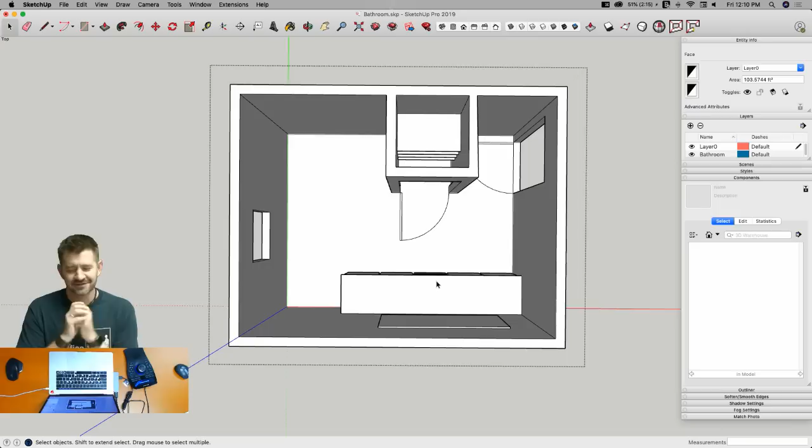All right, I already had a question, so let me throw this out here. In my left hand is the 3D Connexion SpaceMouse Enterprise—you can see that name on it. It's a 3D mouse that allows me to move around in 3D without touching my regular mouse. This mouse is from a different computer, we can move that off screen. It also has a bunch of shortcut keys you can use to facilitate and speed up modeling.

So here we have our bathroom, and we need to put some fixtures in here. I figured we'd start with the biggest one—we'll put the tub in. Over here I just loaded up a bunch of PDFs; I downloaded stuff from the Kohler and Moen websites, and we're just going to use these as reference.

Okay, here's our first piece that we're going to put in—this is a tub, specifically a K716 if you're interested. That's all the tub lingo I know, it's just the title at the top. Other than that, it's just a tub. So we're going to model this. I don't think I'll model it in place—I think I'll just model it outside and drop it in.

So I think that this is what we'll work off of. Whoa, look at that.

I instinctively grabbed my 3D mouse and started moving it around, and it actually works for zooming and panning inside Acrobat. That's very cool. Learned something new.

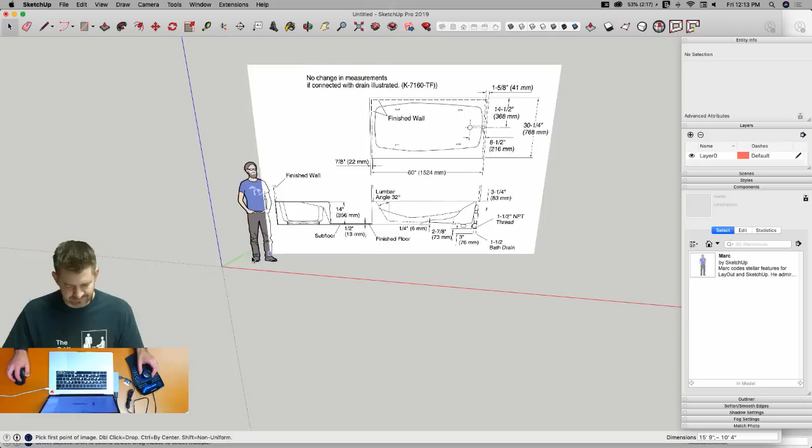All right, that looks like it should be enough information for what I have to model. I'm going to start by drawing a line on top of the image right here, trying to go from about center of this line to about center of this blurry mass. I'm going to use that line now to scale the drawing to proper size.

The reason I draw a line first is I could just click, click, and tell it what size that dimension or reference line is. But by drawing a line first, I can always come back and verify. So I create that first edge in the model, then come in with the tape measure tool and tell it: click, click, that is 60, enter.

You want to resize the model? Yes, I do. All right, so there we go. That makes sense, if you look at Marc's, if he bent in half, he'd fit in that tub type space.

I've got something weird going on because of the field of view. I'm going to set my field of view back to 35. It got changed because I imported that first image as a photo match, so it started to distort my field of view to make that photo match happen.

All right, so I'm going to start with the rectangle. That rectangle is just going to be the outside shape of my finished tub. So I'm going to come here to this point, come up here, and type in 30.25, and 60. I'm working in an architectural template right now, so I'm inputting decimal inches. All right, so that is my initial rectangle.

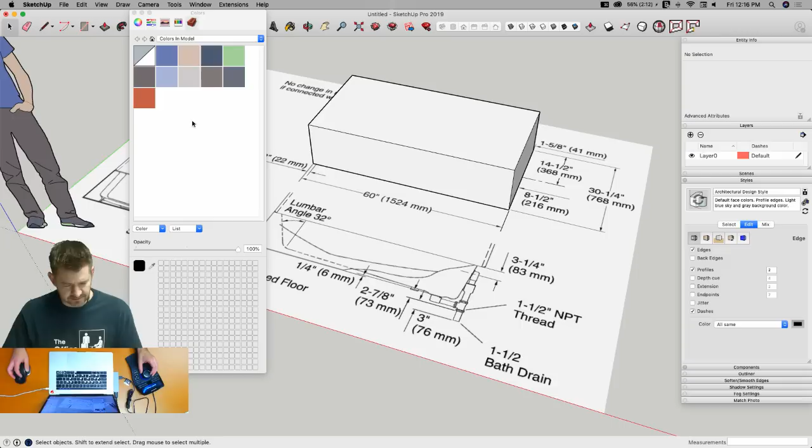Like that, is that better? Is that easier to see? Give me a thumbs up, thumbs down. What do you think, Dave? I'm just reading comments as I wait for the response. Yep, looks good, thumbs up. Sounds like... and a heart. Ooh, we got a heart. Sounds like there's a little bit of a lag, but yeah, okay, that works.

Sure, yeah, and one of the other questions was about modeling or turning out by axes. I actually do this a lot when I model things that are supposed to be on specific axes, I use that a lot. Some people get confused by it, but I'll model with this reddish color for right now. That sounds pleasant. That sounds lovely.

All right, I'm gonna hop to a top view. What I want to get now is I just want to trace this shape. I don't have a whole lot of dimensions for what this shape is, but I do have the shape here. It's not actually centered in the rectangle, it's actually just off axis. So I'm gonna draw a line to divide that top face, and then off that face I'm gonna draw some lines here, just to kind of square up so I can see what it is I'm drawing.

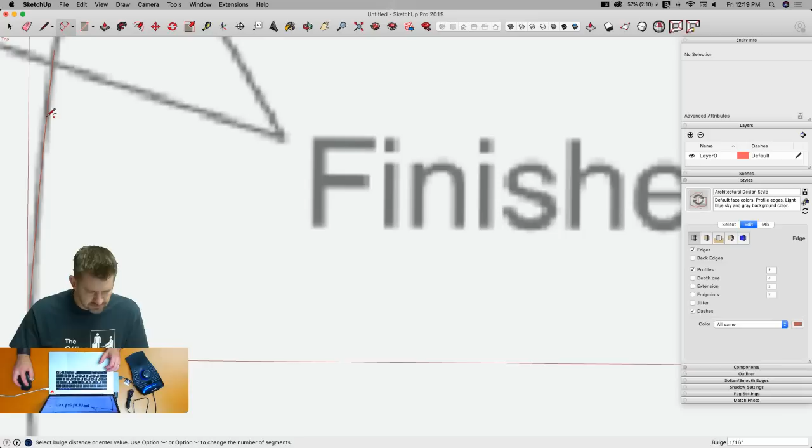And by clicking from one arc to the other, you saw that blue line showed up, which is showing tangent. It's actually just continuing that into a smooth arc there. So if I get rid of all of this and I turn off my X-ray, that's what I got right now. And that looks beautiful. That's exactly what I want right now.

To mirror it, I'm going to pick that surface. I'm going to use rotate to click and use option to just flip that over to the other side. There we go. All right, so that is the top of my tub.

Now let's talk level of detail. Hold on, I gotta get out of parallel projection before I get a headache. I'm very sensitive to that. So level of detail. Level of detail is incredibly important when you're modeling something like this, especially something that comes off of a real world object like this.

It is possible, and I have very little actual detail here. You guys can see this is very simple, I know. So from the side, I have a 32 degree angle off of vertical sloping down, and then I have an unspecified angle here sloping down towards the drain, and then almost no information. So I'm assuming it's pretty close to vertical. That's all the information I have right there.

So with this, I can actually use this image to kind of get an approximation of the geometry there, but it's not going to be perfect. But as far as level of detail goes, it's always a good idea to model to the actual usage you're going to do. So if all I'm going to do, if this is getting dropped into a model where the only intention is to just kind of figure where placement's going to be, I'm moving pieces around, this is meant to just represent a tub, all I need is a massive geometry that says tub.

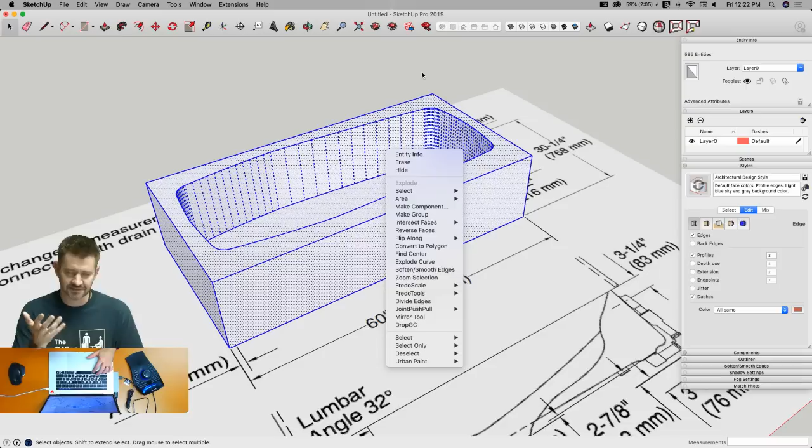All right. Now what I'm gonna do now, this line, I'm gonna take a copy of it and I'm gonna put it right here.

And good thing I set that color to red because I wouldn't have been able to see it on top of the drawing. It's like Dave knew where I was going with that. Thanks, Dave.

All right, what I'm going to do here is trace this profile of the inside of the tub, cut this profile out also, and project that the other way.

I can take these three different solids and create solids out of it and merge them together to get one tub piece. We're doing 3 different ceramic-y type things. I think most tubs are made out of fiberglass now, but you know what I'm talking about. A toilet, sink, and tub.

So I'm going to try to do them 3 different ways. For this one, I'm going to use solid tools, maybe some round corner or something like that. I think with the sink, maybe we'll loft that, and I think I will model a subdivided toilet. We also have a couple pairs of faucet or sets of hardware to model too.

There's going to be hardware in the tub and hardware in the sink, so we will have to come back and model that as well. So we got lots of things to model. Less talky, more modelly. Okay.

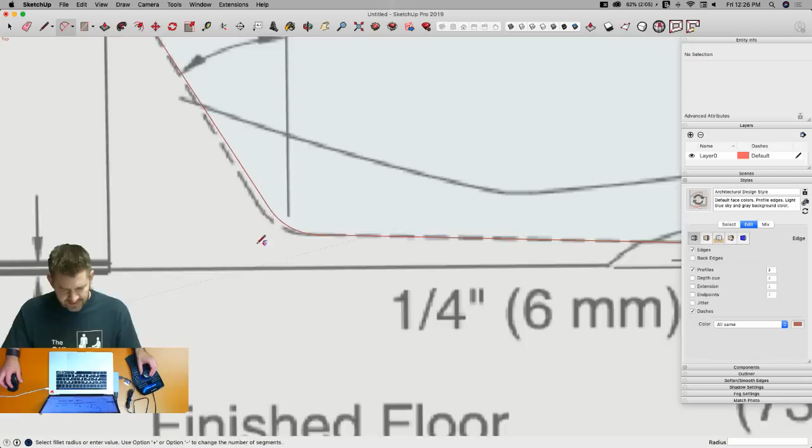I'll do the same thing here. This gets a little weird because what I actually have right here—you see I have multiple lines here and here—because it actually changes profile, right? It's wider here in the middle than it is right here.

So this line right here represents this thick part right here. This right here, I'm assuming since it's the highest point, is right here. Really, at this point I'm just trying to think of the best way to go about this. Really what matters, what's consistent, is this right here.

Here, I need a reference line again, so I'm going to go this way this time. And I'll take these two lines, bring them over here, and turn them 90 degrees.

Let's see, where's the... call that the middle. All right, so with that, I'm looking at something like that.

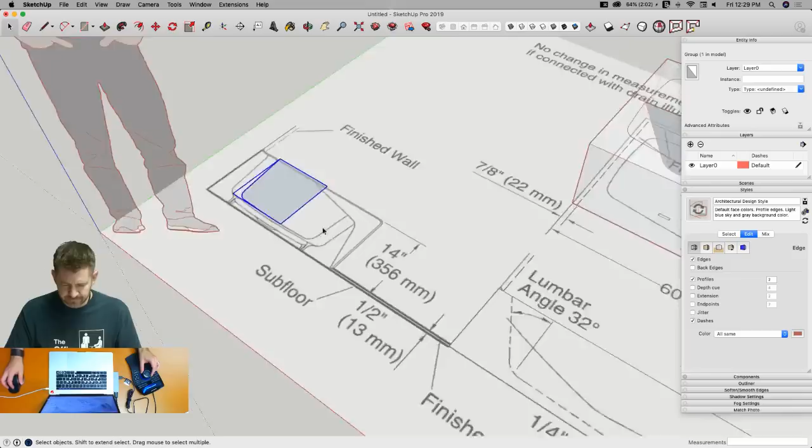So I'm going to take these two groups and make solids out of them. I'm going to click on this one, make it big, both directions. I want to go past the full geometry of the tub. Open up this one and hide the rest of my model.

This is the one I'm not quite sure what to do with, because this profile changes so much. But just to start with, I'm gonna do the same thing here. I didn't weld, got some broken geometry. All right, there we go. Same thing over here, didn't weld. And I'll take this.

Drop that in that space, and then same thing, pull it up. Put down, and then also clean up around the edges.

So now I'm curious, if I just intersect all of this with itself, each of these pieces, I just intersect them all together, what am I gonna have? So I'm gonna make a copy because this may well be disastrous. We'll have to see. Let's see, this is a group, this is a group, this is a group. This is not a solid. We're gonna run

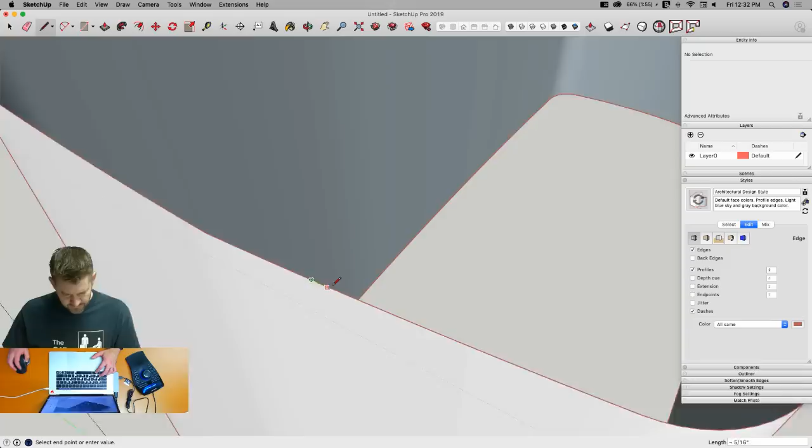Left just at the overlapping pieces. I can already think of one spot that's gonna be a little odd here, so we might have to back out of this, like I said. So I'm gonna just start by making a copy and setting it aside.

All right, so we got to work on that. That's not going to work. I don't know, that looks like it looks like something. It does not look like a tub. The biggest issues we have, so we have, this is decent. I mean, this profile looks okay. This kind of looks like what we're looking for.

This, on the other hand, is not going to work. So we did get the cut at the middle, but it didn't come taper back. You can see that. So I think what we want to do, this is my thought, we're just gonna make a lot of copies of things. I think I grabbed the wrong two. I want this and this, and bring them over here.

All right, and I'm gonna go ahead and explode these because I actually don't want most of this geometry. So what I'm thinking, dangerous thing to do, is that I want to take this profile and trace it around this edge. So I'm going to re-weld that.

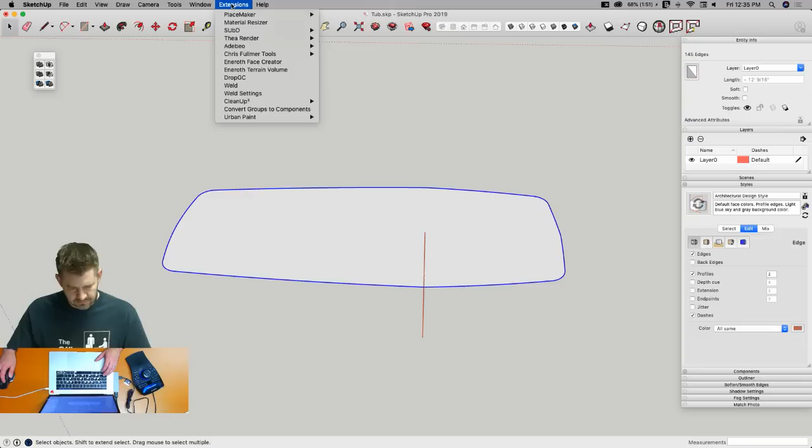All right, explode that. All right, so what I'm gonna do is I'm gonna grab this, I'm gonna say follow me, and my follow me face is in a group right now, but I can right click, I can say edit group, and then click on the surface. That surface will then follow the path, even though that path is outside the group. And that gives me that, which is okay.

Click in here. I've got some extra geometry here to be cleaned up, but overall not too bad. The problem, of course, is we're missing this profile. So what I wonder, if I was to take all of that, let's run solid tools and see how much of that it'll fix.

Not enough. All right, I'm just going to go like this. I'm going to scrub it with the eraser tool and hope I don't create any holes in the mesh. Oh, looks like I'm okay. Oh, nope. See? As soon as I say something like that, it all falls apart.

Kind of like, wow, I really set up without any problems at all, ready to live stream right now.

Sometimes it's the only way you'll learn. Me. All right. Nope, that's not. I know. When am I going to stop talking?

All right, let's see now. I'm going to hop inside of here and start selecting and deleting surfaces rather than trying to drag and delete lines. Sometimes it's easier just to click in, get rid of the surfaces, and then let something like cleanup or solid tools get rid of those extra lines.

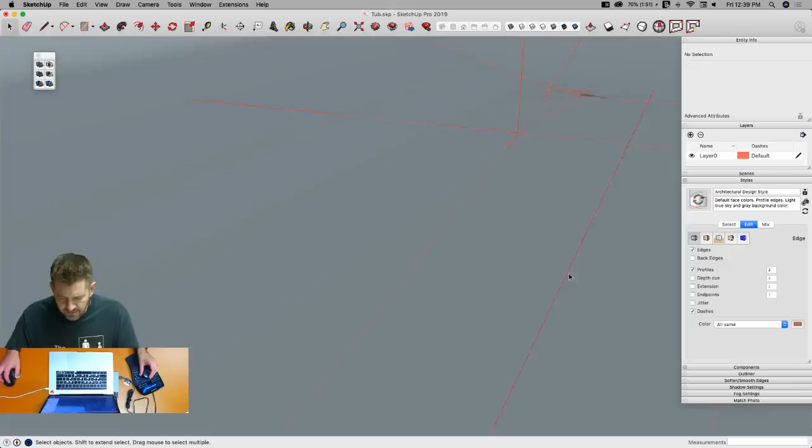All right, so, as Dave says, I'm going to take just these two and get an intersection of those two, see how that looks. And then what I might be able to do - but now here's, again, where I'm pausing.

Select this, some of this geometry. I don't think this is going to work with the intersection. I think I have to back up and do this a step earlier. If I take that and scale it this direction - no, I can't do it with regular scale, but I could do it with taper, potentially, taper scale.

What I could do - this is fun, not really, sometimes it's fun to wing it. Maybe not for you guys, you're like, oh come on man. Let's see, maybe I'll start using these just as reference. So I'll take this to the lowest point right here, like that.

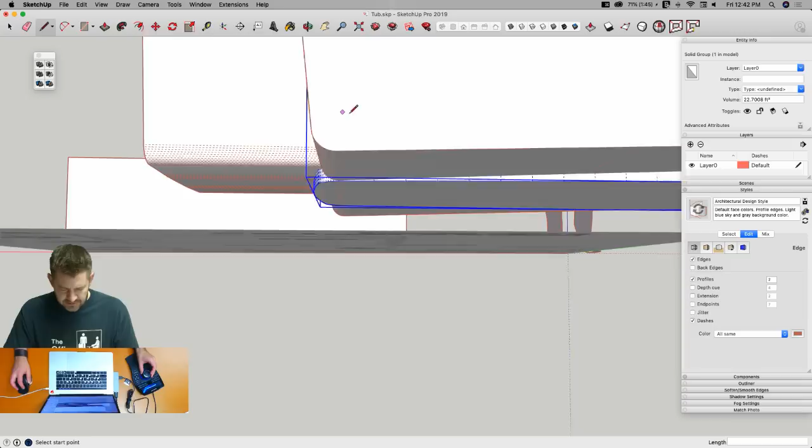Take that out here, and then for reference, I'm going to make a group because I don't want to merge any geometry. I'll take this, bring it up like this, bring it around like this, slap this right here, hop into X-ray, and now take this and I can scale that.

To match that shape. My only problem right now is that I don't have the slope, but I could do that too. I think I might want to do the slope first though, right? Who am I asking? Are you asking Dave?

I don't know. So I'm going to grab this, paste this in, make that a group as well, get that vertical, move that in to right there.

And I kind of wonder if I could just - think if I rotate this, it's going to distort too much, but hey, trying things that turn out to be bad ideas seems to kind of be my thing, so I'm just going to go ahead and grab that. That's how you become better, right? That's right, it's called learning from my failures. Ooh, we could rename this whole series to that.

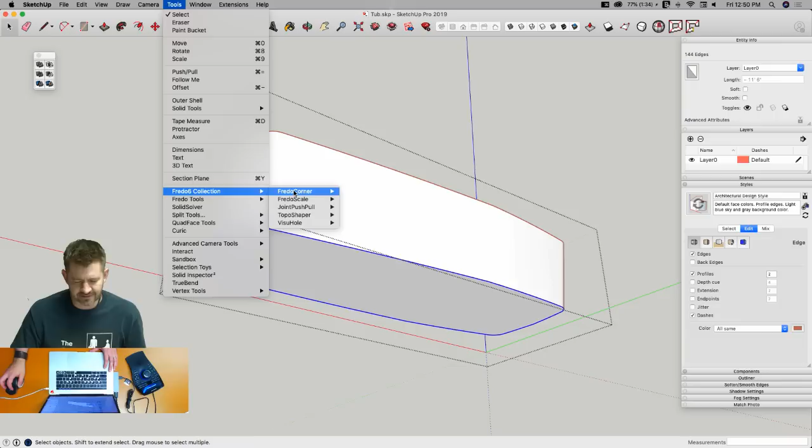Will be using SketchUp over the holiday. All right, nice, something fun hopefully. What are you making, Dave?

All right, so we should be good now.

Ooh, building furniture from Marvin. That sounds fun, you have to share those in the forum.

FredoCorner, round. Yay! I don't know, I don't know what happened there. That was weird, that was just, I don't know, I don't know what that was.

All right, so I'm gonna take a look at a couple sizes here. I'm gonna grab 3 inches. That's too much. 2. 1. All right, so there's a 1-inch offset, or 1-inch round corner. Kind of like that. I might bump up to 6 segments, make it a little bit smoother. Hit the check mark.

That makes sense, that's about where I'm at. Error message, sweet. It's just not your day. Oh man. Yeah, it's pretty cool. Yeah, I know, Ruby error. I got it, I understand where I'm at.

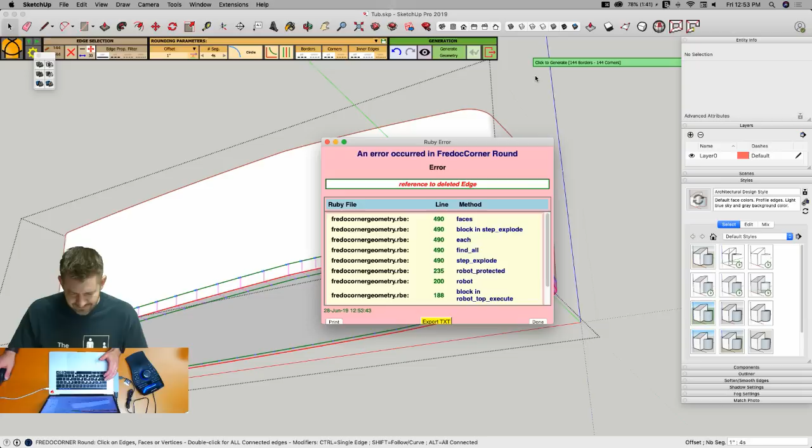I wonder if my edges are just so small. Usually when I have a problem with round corner, it ends up being something like my edges are just so tiny it can't make it work. That's less than a 1/4 inch. It might have something to do with that. Not that I have a good solution for fixing that either.

All right, well, here's the thing. I'm trying to think how far we want to go with just getting something in there. There's a couple ways I could think of doing this right now.

We could try, yeah, we may scale it up and see if round corner likes that. One of the things we could do right now, again, this goes back to level of detail, right? Because I could come in here and grab these lines and soften and smooth those lines, which will give me a soft appearance inside there. Based on level of detail, that might be good enough. Unfortunately, when I say it that way, it totally sounds like a cop-out.

So we're gonna try a couple things before we throw the towel in there. I'm gonna copy this over like this. Actually, no, I'm gonna do it like this. I'm gonna grab this, make it a component, and I'm gonna call it tub. I'm gonna take my tub, option copy over here, and scale this up by 100. And now we have a big tub.

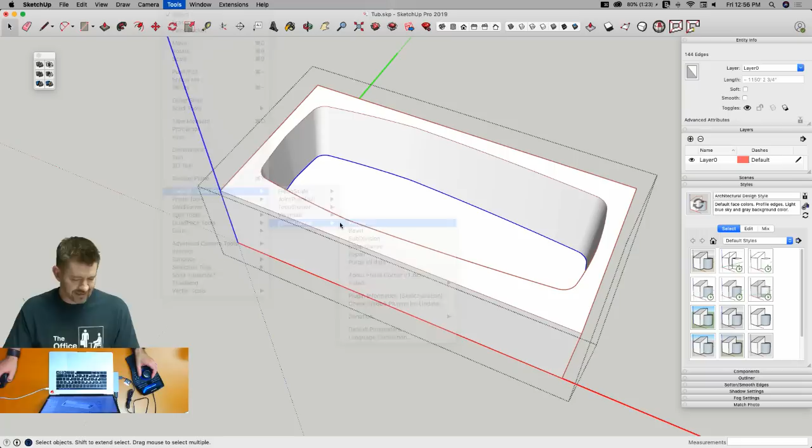So I'm going to say Tools, Fredo Collection, Round Corner. And maybe we'll go up to, we do a 4-foot round corner? No, that's too big, that's ridiculous. Why would you even ask that? All right, 3 foot, 3 foot's too big. So what it's telling me is when it goes around the corner, it'll actually create overlapping geometry and it's not gonna let me do that.

So I have to drop down, 34 inches, 32 inches, what did I have before? Okay, 32 inches will work, 2'8". Check mark, get my round corner, exit, and then what I can actually do is select and delete this big version because I have my original version right down here, which now has nice round corners. Teeny tiny, but they're nice and round. So that gives me that little nice soft inside corner there. Whew, made me work for it, but we got it.

All right, I'm gonna come in here. One other detail was that rounded corner in the front of the tub. And to do this, I'm just gonna throw an arc right here, a tangent arc, pull that to the other side, and then alt erase to soften that. All right, with that, that's my initial tub.

I could come in here, well, I'll just go ahead and do it. Show me this. I'm going to... right here is the surface. So I'm just gonna do this to get a quick drain in there.

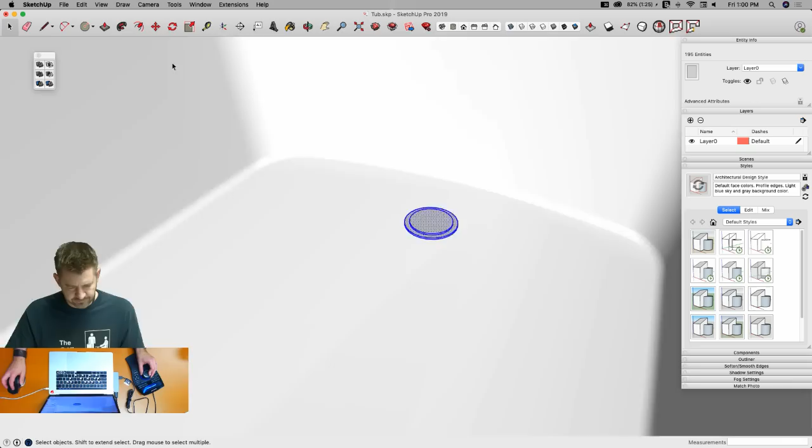Now I have just this edge around the outside here, and after I save, I will go to Fredo Collection, round corner, and try this one more time. See if it'll let me go a little bit bigger on this one. That's 3 feet. How's 3 feet sound? Boom, do it then.

Oh, we got a little weird geometry here, but we'll check that out. Something lapped back over. I don't know what this is. That was odd. Anyhow, it's gone now.

Every once in a while that Fredo corner will do that, and actually it's kind of interesting because normally in a case like this where you round it over, it'll end up creating that surface back over that fills that gap, so it kind of covers the tub back up. So I was kind of surprised that didn't show up, just a little edge showed up.

Having said that, all right, we have the tub I think we were looking for. So I can delete this, and I'm gonna come back down here. So this is already a component, we've already created this and saved it as a component.

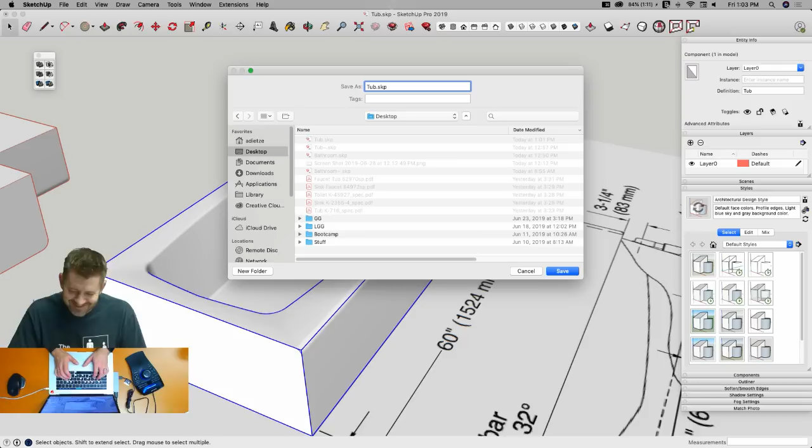That's something you might want to keep in mind when you go to do something like that: if you just take your SketchUp file, you're not going to be able to directly import without everything else coming in. By hitting Save As, you're taking just that component, putting its own component out over here to use. So just an FYI. All right, so I want this to be snapped back to that back corner.

Hey, you know, for being what I would potentially refer to as a bit of a nuisance to get going, that looks all right. That looks pretty good. I'm pretty happy with that. Pleasantly surprised with how well that turned out. All right, time to start the abuse all over again.

Hopefully you guys are learning what not to do. Somebody said they're using this as a learning experience. I hope so. I hope this is helping you guys, because, well, you saw, I don't have to explain. The rest of it's going to go swimmingly. Nowhere to go but up, that's what they say.

All right, let's create a sink and drop it in here. So I'm going to save my bathroom. I'm going to go to File, New again, and hop back over to Adobe. See, my Mac's doing weird stuff too, like every time I switch programs it doesn't show it. So there may be something else going on here.

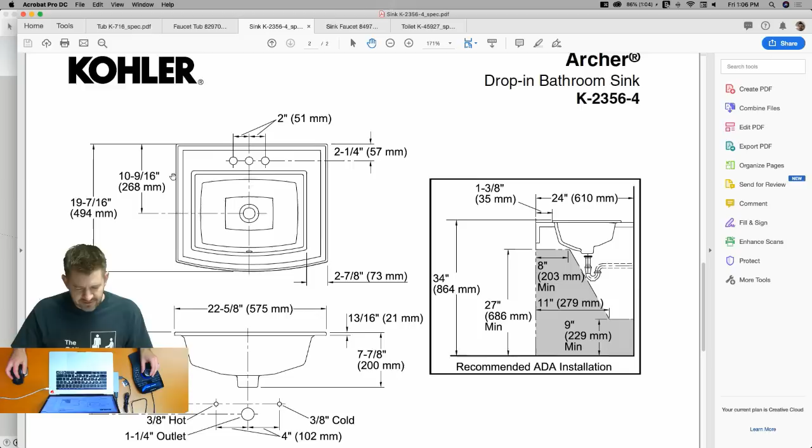All right, so I'm going to take another screenshot, pull this in as my reference image. I don't think I need anything off of that, that's all installation, so I'm just going to grab that. I'm going to hop over here, File, Import, and we're going to grab image, use as image, and grab that newest screenshot I just made, and make it nice and big.

So here's my thought. My thought is I'm going to create the profile initially of this sink, and then create this profile right here, this lip that drops down. If I look at it, this is actually a slope, it kind of slopes back down and then into flat. So create that profile here so it slopes up, this section's actually a slope down, and then this is flat. So create that profile, create this, and we'll start by just following that, swinging that around, and then we can come in from there and fill in the actual basin of the sink. So we're going to do that.

This may be an opportunity to model half as much because it does look like this sink is symmetric, as are most sinks, of course. Say that like it's a unique thing in this particular sink, but sinks are usually the same on the left and the right. All right, something like that.

Vlad says you can use sandbox tools for this model, it might help. That is true, sandbox tools would work on here too. I don't use sandbox tools as often as some people, and that's not a knock against it or anything like that. I'm going to come in and change my... how's that look on the screen? A nice orange color, because I'm drawing on top of black lines again. I don't end up using sandbox tools very often, I'm not sure why that is. I think maybe when you start using something, whatever that thing is, you kind of develop your own workflow and the tools you prefer, and those ones kind of leap out at you. I think I just never really learned sandbox tools very well, so as a result I just don't use it as often as some people do. There's nothing bad about them, I think they're awesome tools, and I think there's some very cool workflows you can do with them. But yeah, maybe I need to do that, I need to learn myself up on some sandbox tools.

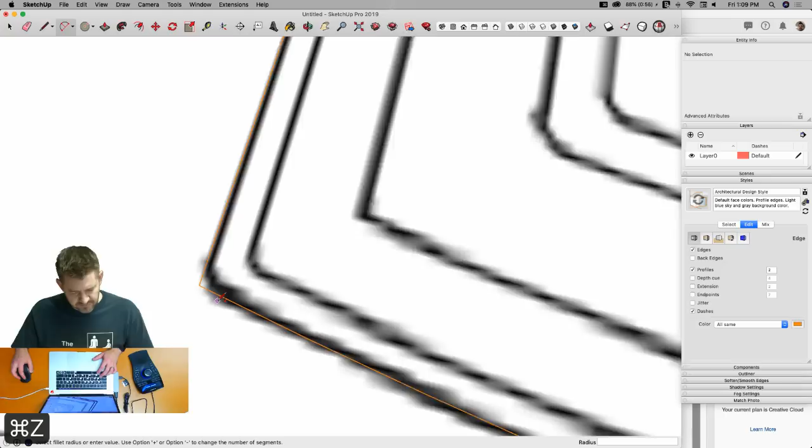A larger arc right here. I'm going to give the material some depth. I'm going to say our sink's about that deep. Come over to here. Something like that. I'm just going to use a couple more arcs to soften these corners.

Ooh, yeah, that's nice. All right. So with that, I am going to take all of this minus the image, so just those lines now, and I'm going to weld them. All right, so I should have one continuous line.

Again, I weld before follow me, so I have a nice continuous curve. Follow me will break at any line breaks, so I won't have a continuous, nice, smooth curve all the way around if I don't weld it first.

All right, so with that path selected, follow me, and I'm gonna click right here. All right, that looks pretty good. It's inside out, but I think it'll work. We did have a little bit of overlap on these corners.

Not necessarily a bad thing. This is actually something that happens a lot. Oh, I was a little bit big. This arc, I'm actually going to undo a couple times.

So this, all right, so I should be inside. I should be more like that. Maybe that should be at that line. Let's try this.

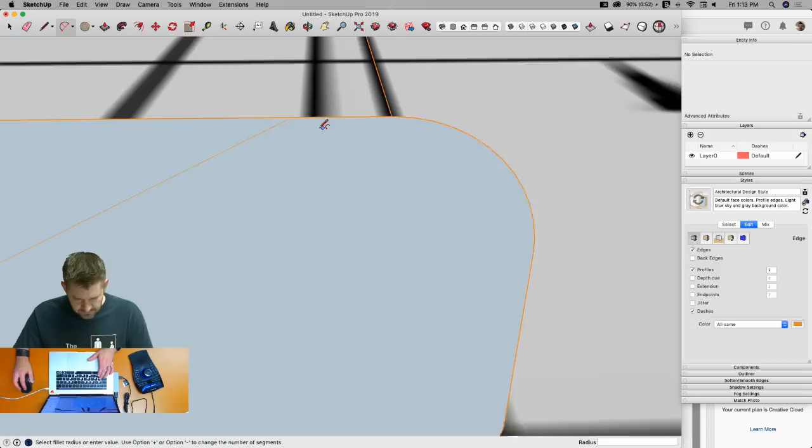And then while everything's selected, I'm just gonna right click and say intersect faces with selection. And that's gonna give me primarily this cut right here where these two faces—these are flat faces. If I show this, they're just going in and touching each other. So because it was such a tight corner, it didn't clean that up.

But now I can actually come in here, delete some of these extra lines. Actually come in and I don't need that. Don't need that. Just any of the surfaces that were created by that overlapping geometry, I can now get rid of.

And I can come in with Alt and soften some of these pieces. Now there are some spots that are weird in that if I flip around on the inside, you do have this additional geometry hanging down. But I can fortunately just grab it and delete it. I should have one on either edge.

There we go. And this is basically—there we go. And then again, I think I actually had a little tiny surface here that didn't close up. This may be a sub-millimeter issue here. I don't know, it was just tiny geometry, I guess.

We may have been able to actually—is that another snap point? No.

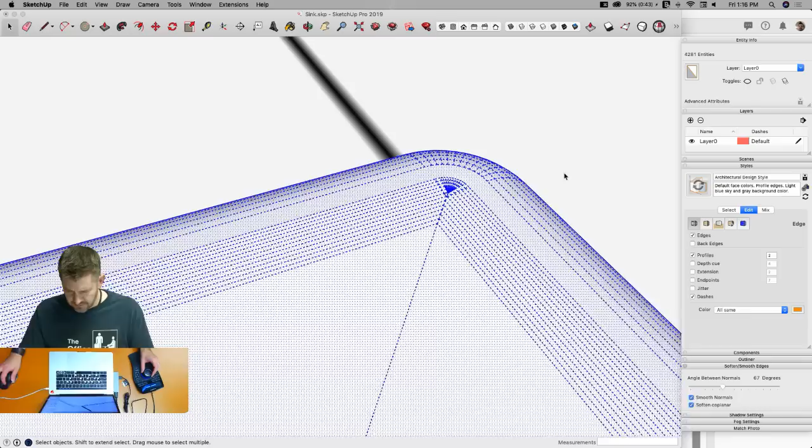One person said solid inspector 2. That would have helped. And then another one is saying, why not offset the path line and create an inside path and use follow me? It will avoid overlapping. That's true. Yeah, I could have actually come in here and done that. That's a great idea. See, you guys gotta be louder.

I was head down, thinking, talking. That was all my fault, sorry about that. Type in all caps and I'll make sure that's right. I'll relay that message. No, don't do it. Don't do it. All right.

Okay, so I'm going to pull this geometry in. I'm going to basically finish this top level geometry. This is the top, this is the bottom, so this part is the flattest part, that's this portion right here. And I have this section which is right here. And then all of this looks like a rounded, sloped part right there. That may be able to be included on a follow me. Then this will have to be lofted, this will have to be lofted, and this will have to be lofted. We have lofty goals. One more arc right here.

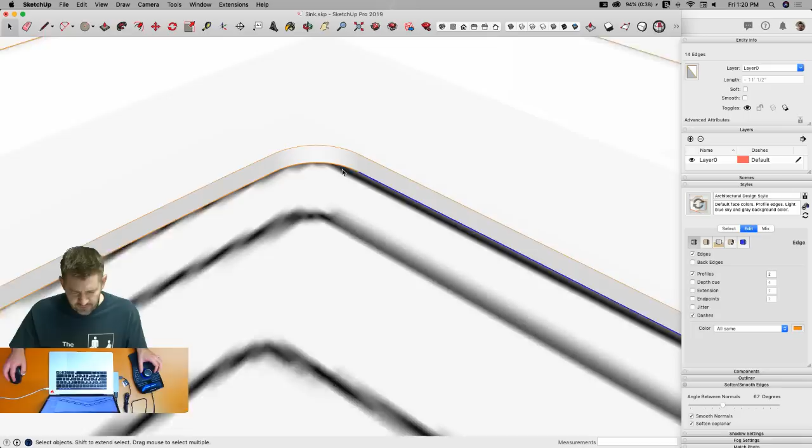All right, I'm grabbing it all. There we go, grab that, and I'm going to offset that once to here. Can I come down to here? Nope, that profile doesn't match anymore, totally different once we get down there. All right, so that's as far as I could go, just that one. And like I said, I kind of feel like that's actually just an arc going downward, so I'm going to do just that.

Dave says weld didn't work because of the fork in the edge. We're modeling sinks, not silverware, Dave. That's just not paying attention. Because of this, is this what you're talking about? Yeah. Because I told it to do something it couldn't do, and then I was irritated that it didn't work. Sounds like a software user to me.

All right, I'm going to unhide my image and come in here and round these corners again. And actually, this is going to be a bit of an issue. No, I don't want to do that because I can't use this to round, I have to use my outside profile to round. So get rid of all that. Because what I want to do is actually follow this path. When you do something like follow me, you can only follow one path, so I don't want a path for top and bottom. If I was lofting, that's what I'd want, but in this case I'm going to use follow me.

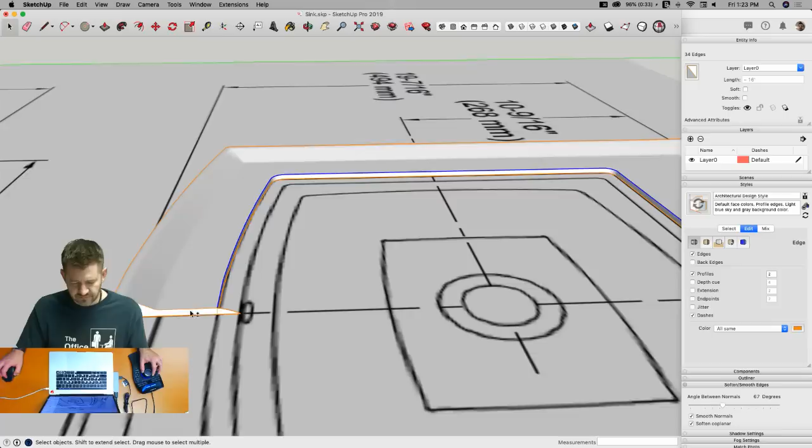I'm going to go put in my arcs right here, so I have my two arcs. This is going to be the profile, I'm going to try to get that nice rounded corner. I want to try to do that. So I'll just drag this down to here. Then I'll also take that profile and put that on the edge of this line. Whoops, missed it. I lost my model, how'd that happen? I dropped through the floor. All right, we put that like that, pull that down as far as it'll go. It's right there, so that gives me that.

Now all I have to do is loft a corner. I don't want to necessarily loft all this. Actually, I could probably do the same thing here, I could probably use follow me just on this first part. Let's see. Only one way to find out, and that is to try it live in front of a couple hundred people. No pressure. No.

Vlad wants to know if offset would work for the first path. I actually did offset, you mean this path right here? Yes, I did offset, but offset is a two-dimensional tool, so it took the line and offset it. It won't take full geometry and pull it over or anything like that. So I'm going to grab that path and then... lost some persistent IDs. All right, follow me just along that path. So that looks pretty sweet, that's nice. So to get this portion right here, this is where I'm just going to do some lofting.

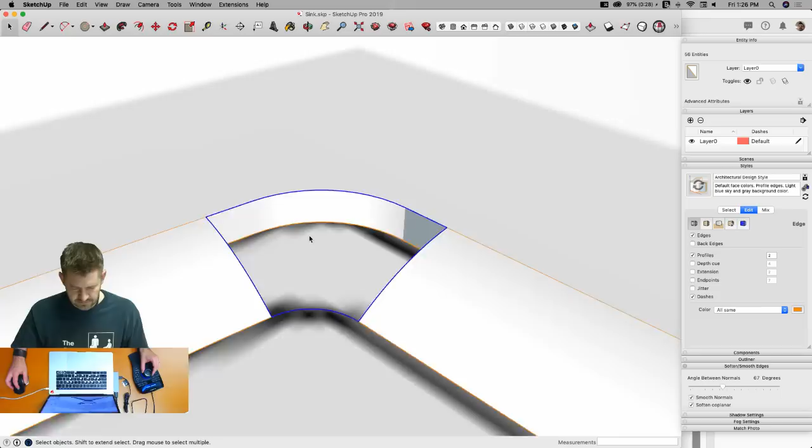Alrighty, that's how I roll. That is apparently how our day's going today. You know, the problem is that live streaming's a young man's game, and I had a birthday yesterday, and now I'm old. Maybe that's what it is. I'm going to have to recruit somebody younger to come in and do this for me. Oh man, now I'm sore, and everything's going bad.

All right, one more time with feeling. Turn off these lines, and these lines. Swinging around.

All right, we'll go to Tools. It's not there anymore. All right.

Everyone's saying you have to stay, no younger people. What if they're more capable? Oh man, it's good, it's fun, it's something. And everyone's saying happy birthday. So, oh, thanks all, there we go.

I had that kid. See, here's the thing, much like when you work in an office, you're like, oh, do I mention that it's my birthday? Do I just keep it quiet? Yeah, we never knew, it's just kind of what you do when you get a certain age, I guess, just keep it on the DL. Nobody wants to admit it. And I think when you're in an even bigger group like this, it's more impetus to keep it quiet. Maybe I had to unburden that, and now that it's out there, it will be lifted and everything will go smoothly.

You ate too much cake yesterday. I have, oh my gosh. Okay, so speaking of being mature, I had a straight up sugar hangover today. Oh man, I came in. I did not drink any alcohol whatsoever, but my daughter made an awesome cake, and my wife bought me donuts for breakfast, and I came in this morning. I had just a headache, stomach was a little unhappy, oh man, it was. So the nice thing is, for all you young people out there, one day you get old enough that you don't have to drink alcohol to feel hungover. You can do it just by having dessert. Oh so yay, something to look forward to. Oh man, yeah, so good stuff.

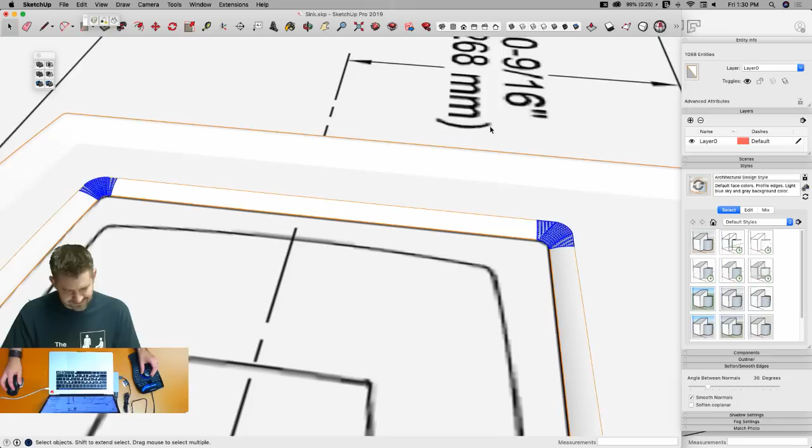Looks awesome. And since everything's going to go perfectly from here on out, I'm feeling very good about our future. So I'm going to save that.

I'm going to unhide my image, and we're going to talk about these pieces right here. So to get this in, I'm going to do that. Actually, I don't need the surface, I just want that line to work off of. I'm going to work my way out. Start with a circle right here for the drain. So that's where it's going to come down to, where the sink will terminate into our drain hardware.

Just like I did before, I tend to draw my lines that I want to reference first, and then I'll come back. Ooh, that actually is a pretty close to straight line, maybe a little bit of an arc there. I'm going to grab an arc, go from here to here, a lot like that. Another arc from here to here.

Actually, I think this is symmetrical, so I'm only going to draw a quarter of this sink. And I am going to draw a small round corner there. I'm going to use the same size arc as I round all corners. That's going to make it much easier to go in and loft, because it'll be the same number of edges. I'll get a nice even loft that way. If that doesn't make sense, hopefully it will in the near future.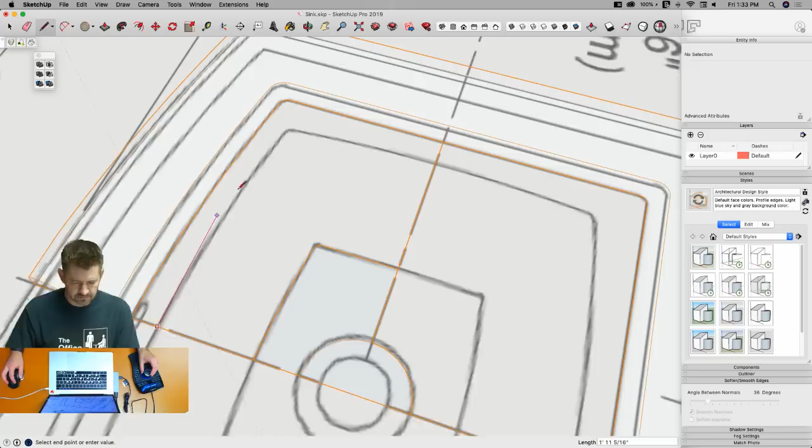All right, so there are my steps of the sink. Like I said, I think—oh, I can't. So I will have to loft this section and this section, but this section right here I'm gonna have to do separate, it's two separate pieces because this loft is gonna be different from this loft because of the curb at the front of the sink. But that's okay.

I'm gonna grab these pieces and take them over here now, line them up with this point, and bring them up like that. Now what I can do is grab these different edges and offset them up to the right vertical height.

You guys noticing too how not all of this is lining up perfectly? Somebody said, why aren't you using the mirror plugin? That's a good plugin. Actually, I just for the first time used Curic Mirror this week.

Now, if you guys have seen that, it's a pretty cool extension. It's on the extension warehouse. I don't want to spoil it because I did a video on it, and Kara's in charge of content, so I'll get in all kinds of trouble. But it is a very cool extension. Like I said, a lot of you know I haven't used a whole lot of mirroring extensions in the past.

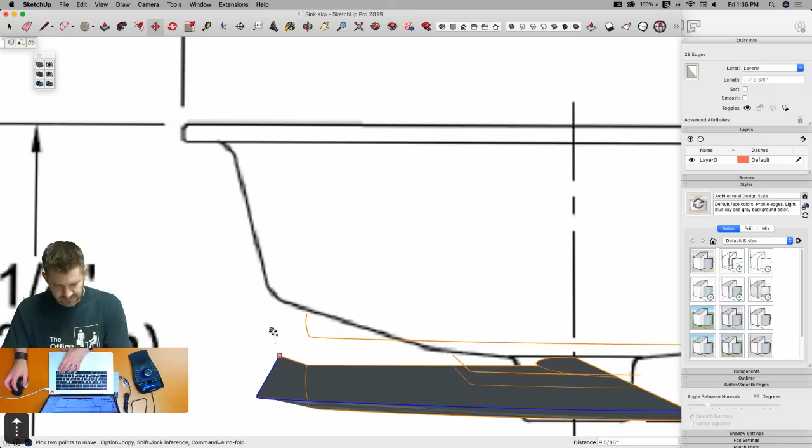But in reality, this plan—so probably not going to believe this, but there's a potential that the plan is a little off. That's a thing that happens on occasion. Yeah, I just blame the plan. I know, typical designer. All right, take that.

I'm gonna take all that now, rotate it flat, and I'm going to drop it now right here. Get rid of this. Go back to my normal perspective camera, and rather than moving this out of the way, I'm just gonna hide it. I know a lot of people don't love the hide functionality, but I like doing it to get rid of geometry when I can. All right, this is looking cool.

Actually, now it looks really deep, doesn't it? It's a deep sink, that's just what it is. Now I need to get this. Oops. These are my different layers of angle here. So I will want to put a little bit of a kind of a turn on there, a little bit of an arc, if you will.

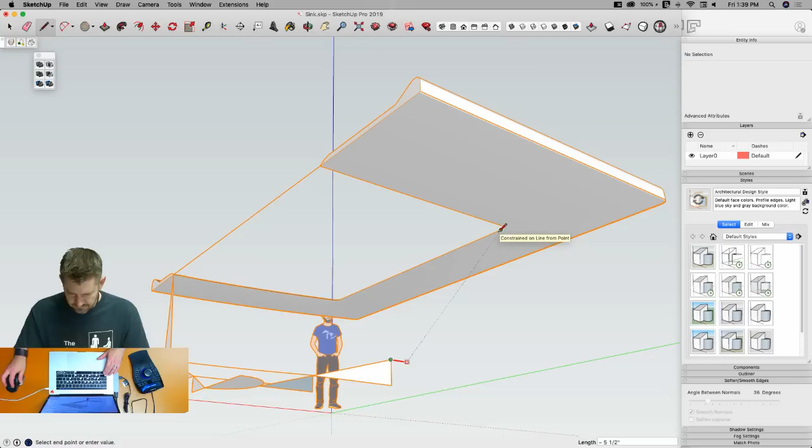I'm gonna copy it out here, like that, and then I'm going to just rotate it 90 degrees and see how close that comes. Not so close. Okay, so I was just checking that.

So apparently this kind of sink is common in the high-end market. Oh, that's the reason I'm not familiar with it. Is that what you're saying? Oh, go back to Walmart and get yourself your cheap sink, Aaron.

All right, I'm gonna save. No, it is a cool looking sink, that's why I grabbed it. All right, I'm gonna try lofting this piece first. All right, that looks pretty slick.

So where did you find this sink? Somebody's looking for a photo of it on their site. There you go. It's a Kohler K-2356-4.

I went through the Kohler site and just grabbed a tub, a sink, and a toilet that looked like they might go together. Yeah, that was all the work I put into it. So it is, but I liked it because it was a cool looking sink. It had a lot of faceted yet not flat geometry. Silly me, no, just kidding.

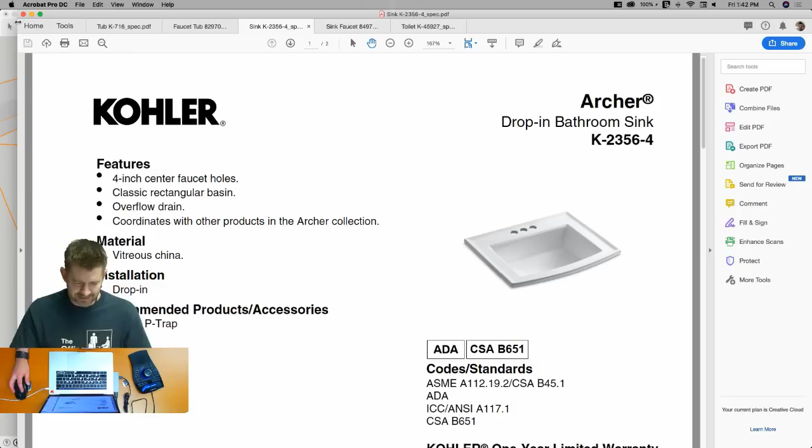And they can find this model on the 3D warehouse after you're finished, right? Odds are good. All right, at some point. I did put up last week's just recently, so yeah, this hopefully will go up as well.

All right, now that I have this copied over here... what was that? Uh-oh, I made something not straight because it didn't close. Undo. I want to figure that out before I go any further.

So here is a vertical plane. What did I do? It looks like it's... oh, no, look at that. I messed something up. Had to go talking about how everything went well there. Exactly, you jinxed yourself again.

All right, so if I pull this over, I'm gonna try to be reckless and see what happens. What could possibly go wrong? It's just a teeny tiny bit, so I think I'll be okay doing this. Nope, dang it.

All right, let's do that again. I'm not quite sure how I even did that.

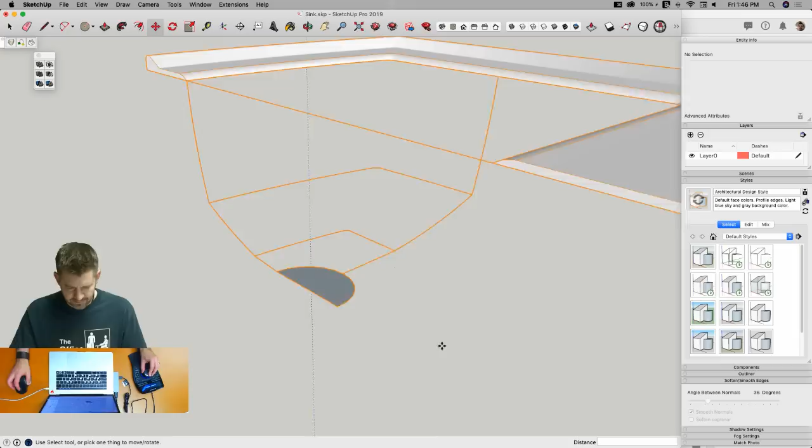All right. Oops. Figures, oh, I missed a chunk. Ah, little extra line segment down there.

There we go, skin it. All right, this is going to be good. All right, there we go. Hopefully there we go. Let's copy and see.

Copy these two, scale that to -1 again. Grab that and snap it where it needs to go. All right.

Anybody else do this when they're trying to look at something small, rather than zooming in, move their head closer to the monitor? Man, I do that. It's still, now I'm overlapping.

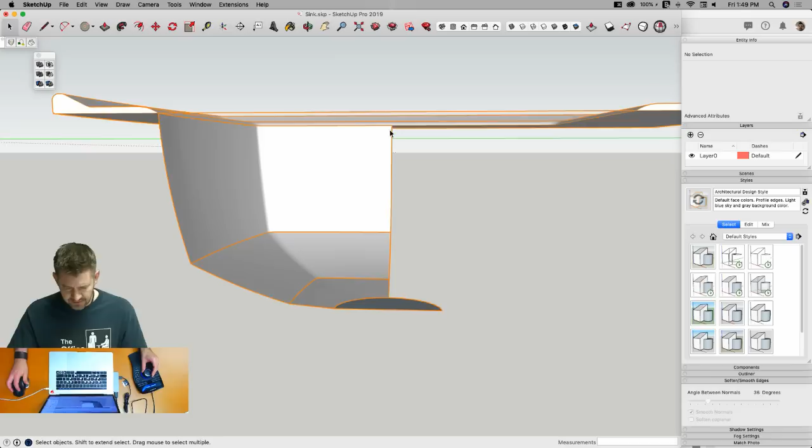Oh, look at that. Oops. All right. So this right now tells me that this is a flat edge. I'm going to check this edge too, just to be sure. Ooh, look at that. Okay, so I'm good now.

So now that means I should be able to grab these. I'm going to grab all of them just to make sure. I'm going to copy those over here. I don't know what happened with you, but I don't even want to look at you.

All right, I'm going to grab this, scale that to -1, and I'm going to stick that right there. And that should all line up. Ah, nice single line. Okie doke.

All right, oh, actually, I'm gonna leave those there for right now. All right.

Last step in the sink. Put another arc right here. Like that. Now I should be able to grab all this.

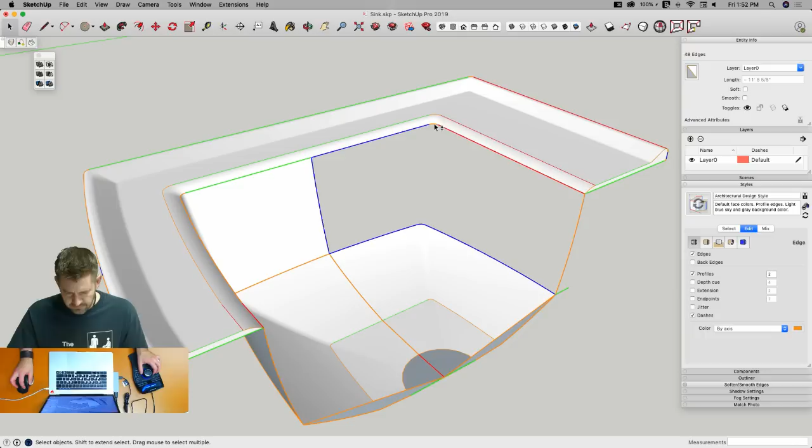And then I'll just hover over this surface right. I gotta turn. And option to copy, and one click. This is actually a pretty dense model. All right.

Ooh, all right, same thing here is gonna be an issue though. I'm gonna grab these surfaces, intersect with selection. That should get this middle line to mostly merge together.

I'll probably have to do a little bit of cleanup though, and maybe just come in here and should be able to delete. This one can be deleted, it's actually along a straight surface. So can this, and on this side too, delete, delete, delete.

All of this can be deleted. And this, because it's at an arc, actually, nope. No, actually I just have to erase it. And then get rid of this and this. Nope, I have to erase those two.

Ooh, all of your followers love flip along and mirror and follow me. They're all shouting those out for this. Woo!

All right. So that's most of our sink.

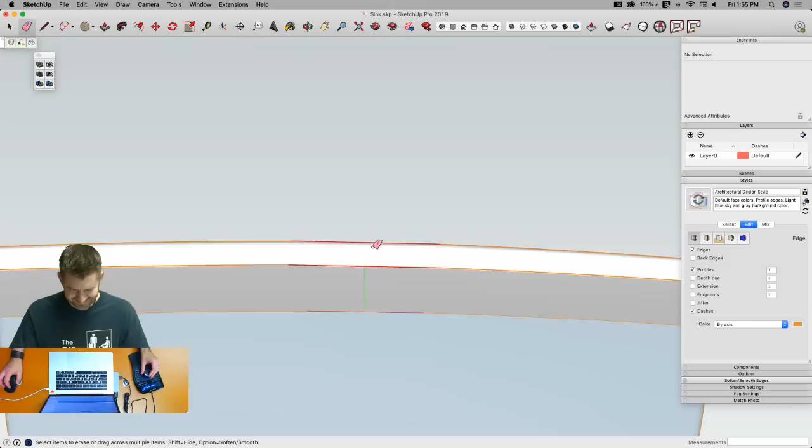Now I can come in and actually use the dimensions that I have on the drawing. Come in 2 1/4 first. 2.25. There we go. And I'll drop a line straight down to the surface. And that's the center one, and then 2 inches over.

2 inches over. Put a circle right here. 1.25. That was radius. I typed the wrong number, which would be a half plus an eighth. So, ooh, too much math. Yeah, 5/8.

You guys buy that? You know where I'm at with math. We're not on speaking terms.

All right, so I'm gonna take that, drag that, oops. Drag that to the bottom. Double click, whoops.

Dave did the math for you. Is that right, 5/8 inch? 5/8, yep. Woo! Count that as a win.

I'm gonna do the same thing I did in the other one, and I'm just going to offset. Oh, I think I got some hidden geometry there. And I'm gonna give that our nice silver finish.

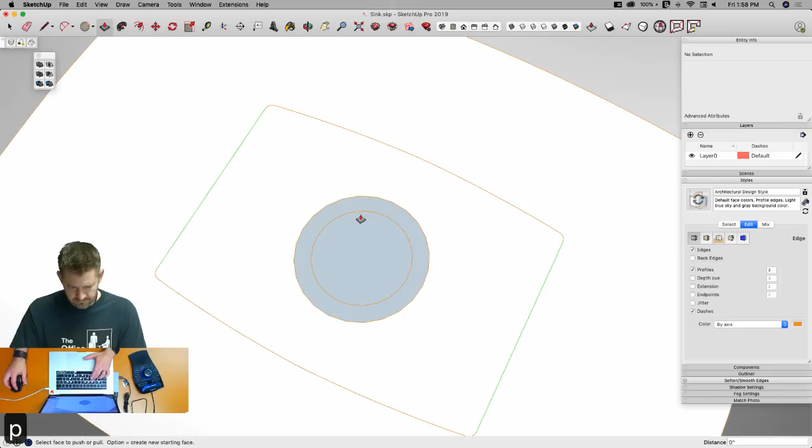One of the things I was saying is this right here is just a single face deep. This does not actually have thickness right now. One of the things I could do, I could try selecting these 3 surfaces and saving. And I could come into my tools and joint push pull thickener to try to thicken this surface.

This is actually probably something I want to do at a larger scale. Well, we'll see. Joint push pull allows me to take interconnected geometry like this, like smooth geometry, and actually push pull it all as one. So actually, that worked not so badly.

That actually gives me, so I look at X-ray, you can see I actually have some depth to that sink rather than having it just be one empty face. More than just an empty face.

All right, so yeah, I'm gonna do the same thing I did before. I'm gonna select all this, make it a component. This is my sink. And then I'm going to take it and save as. On my desktop, I'm just gonna call this my Friday sink. And that way I can import it into my bathroom.

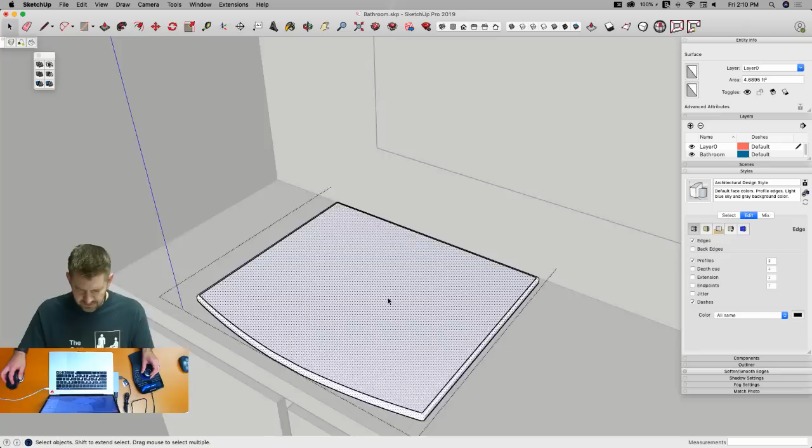Actually, what I should probably do is Dave-method this thing. Alright, so there, that's what I would expect.

I'm gonna grab this corner, option copy it, drop it right there. And of course you'll notice that I did not cut a hole into my countertop, so the sink is just going right through it. So what I would generally do is double click to come into this context.

Here's how I would go about this. Whether this was a circle or an oval or whatever, usually what I end up doing is just cutting a big square like this. Grab that line right there, slide it back under the sink, have this right here, slide it over, and there we go, we got a hole for the sink.

And what I could probably do is hide the rest of my model, grab this shape right now, option copy it, stick it right here, and then when the rest of the sink shows up... alright, so there we go, we got a tub and we got 2 sinks.

Sweet, getting there. Alright, this is the fun part, this is what I've been looking forward to the most, is creating a sub-D toilet. I haven't done this before. This has always been one of those shapes I thought would be kind of cool to do, but I've never done it. I'm gonna save this

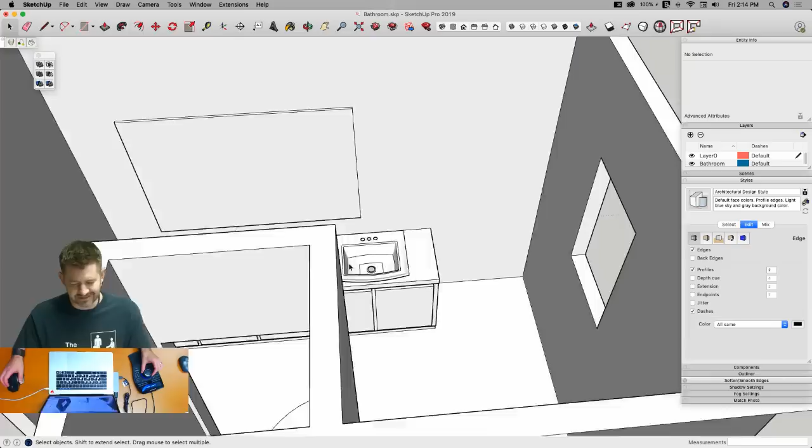Just like when we talk about scaling up, the Dave method, that kind of stuff, where we need to make stuff bigger to work so we don't run into small edge issues - that's especially apparent when dealing with smooth geometry. So when you're lofting, following curves, doing subdivision, that kind of stuff, the bigger you work in, the less issues you'll run into.

So in this case, I'm just scaling my toilet way up. It's going to be well over 6 feet tall, and that's cool - that'll be okay for what we want to use it for right now.

All right, I'm going to come in here and start with a rectangle. Like I said, we're going to do subdivision, so I'm going to use vertex tools a lot. I actually have a shortcut key for vertex tools, assigned to the letter V on my keyboard - it's also on my mouse. That hops in and activates vertex tools for whatever's selected.

I'm also going to come up here to tool palettes and turn on quad face tools. There we go. So this is going to give me a bunch of... it's kind of cut off, I know.

If I go anything below this one, nope, I won't actually use these two down here - it's draw line and live mesh analysis. So good, the UI did not get cut off, unless I raise this arm too much, then I'll hide the UI. I'll try not to do that - no promises, sometimes I do just raise this arm.

I don't know. All right, so I'm going to go in and start with a rectangle, because that seems like a good place to start. All right, so... something like that. Now, when I start thinking about how to break a model down into quads, I basically start by looking at one side of the model.

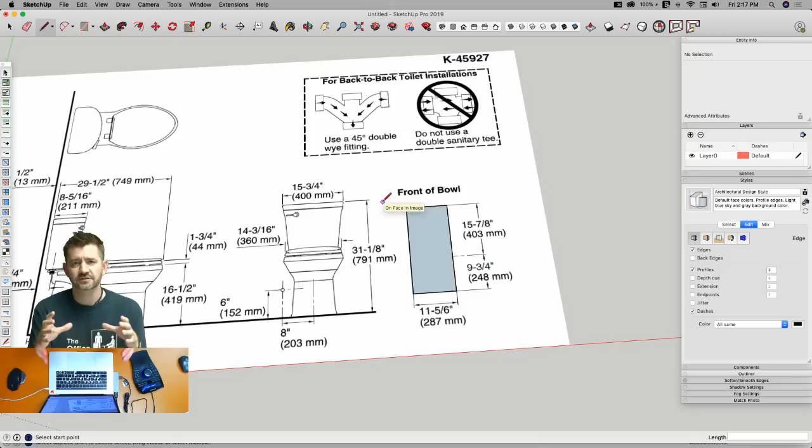All right, I'm going to take this now, and what I want to do is use push-pull. Every place that I think I'm going to want to resize my mesh, I'm going to create a new surface. So I'm going to step up once to this little break here, so I have a little kind of coming in like that. I'll bring it up to here maybe one place in the middle of this, then here, then here, then here, then here.

I'll do the seat separate, so maybe I'll just do the base as one mesh, and we'll do the tank as a separate mesh, and the toilet seat as a third. So any place I would want to break this for geometry, I'm going to create a new push-pull.

I'm not going to use the regular push-pull though, because I'll pull this first one up - so that's my first break. I can hit Option to create a new one because I want to keep this line - that's the whole point of what I'm doing. The problem with a standard push-pull is it actually leaves a surface in here.

If I delete this out, you can see this piece surface is in here. And what happens when you subdivide a surface like that, it's going to basically keep tension on that joint so it doesn't end up smooth - it'll actually end up sharp because of that surface back behind it.

So what I'll do instead is go back to my tools and pull up my Sub D toolbar - these toolbars are both extensions from ThomThom. He has a special push-pull, and it works the same way, but if you do Option and copy something up like this, if I look in here and delete, it doesn't keep that inside surface.

So I'm going to try to remember, again, training your brain on all this stuff. I'm going to try to remember to hit this push-pull rather than the standard push-pull as I work my way through here. I'm going to create a new surface partway up that, going up to about there. Probably have a break in between here, come up to here, and then one more like that.

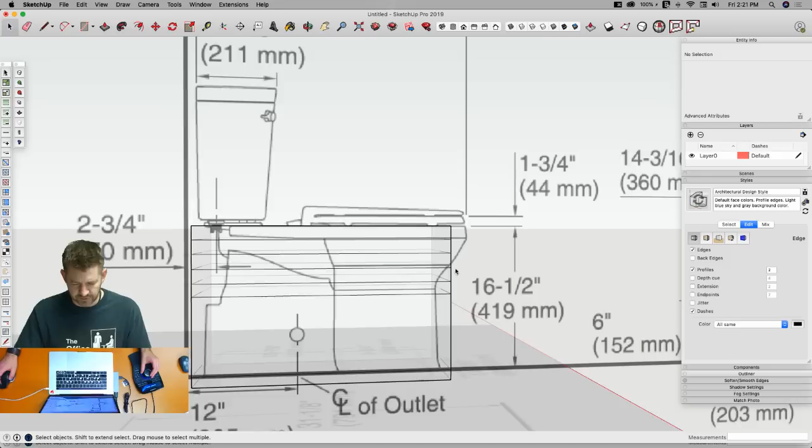All right, so maybe something like that. So I'm going to take that right now, turn off X-ray. Just looking at that, here's what happens if I subdivide that. Okay, so you see, we're getting the general smoothed over look of our toilet. Obviously, I only did one dimension right there, and there's a whole lot that's left to be added. But that's the general idea. That's the direction we're going right now.

I'm gonna undo that, and there's a couple axes I want to add some geometry to. First one being, whoops. If I look at it this way, it's monolithic right here.

Whoops, I made a mistake here. Better bring that back up. It still looks not right. I didn't bring it back far enough either. Edits are tough. Not that I'm blaming anybody for anything.

It's cool, it's cool. What's that plugin from ThomThom again? So I'm using a couple of them.

I'm actually using Vertex Tools. That's how I was doing all that editing and moving stuff around. I'm using Quad Face Tools, that's this tool set right here. I haven't actually used anything on Quad Face Tools yet, but I will. And then of course Sub-D is the big one that I'm using right now because that is the subdivision tool.

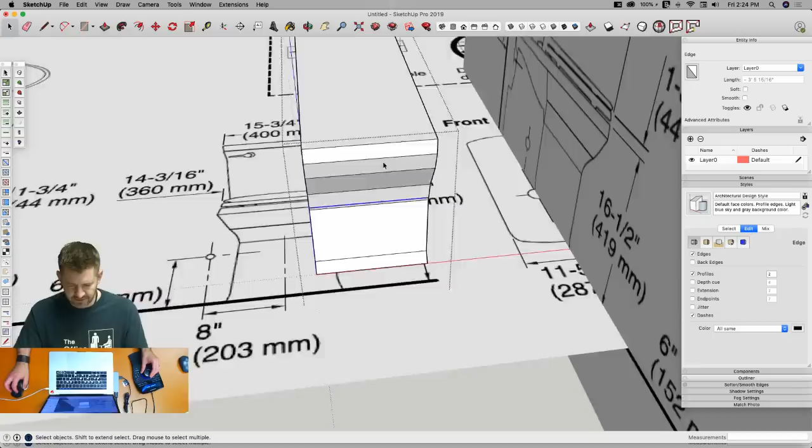So I'm going to grab this chunk right here. And Vertex Tools gives you this widget. The widget has these move tools, so I can grab these and just scoot pieces wherever I want to. Or if I grab the other end, it'll actually scale. So I can do stuff like scale like that.

Take this top section, make that a little bit thinner. This is cool, and the reason I like this step so much is it's kind of like sculpting rather than precision modeling. I'm actually ending up sculpting together the geometry I want to see.

As I do this, one thing I should point out is it's not always super easy to get exact geometry when you're talking about subdivision modeling. You get approximated locations of points like this, and when you select and subdivide it, it rounds your geometry based on those points. We'll touch on a couple other things that make that easier, but it's not always a quick process to get models exactly the way you want. Sometimes you have to overcompensate one way or the other before you subdivide to get the final smooth geometry that lines up with what you're looking for.

All right, this is coming along. I'm actually going to have to do this as a couple separate pieces. So I'm going to come in here, grab these lines right here, and move them vertically in line with this. Same thing here.

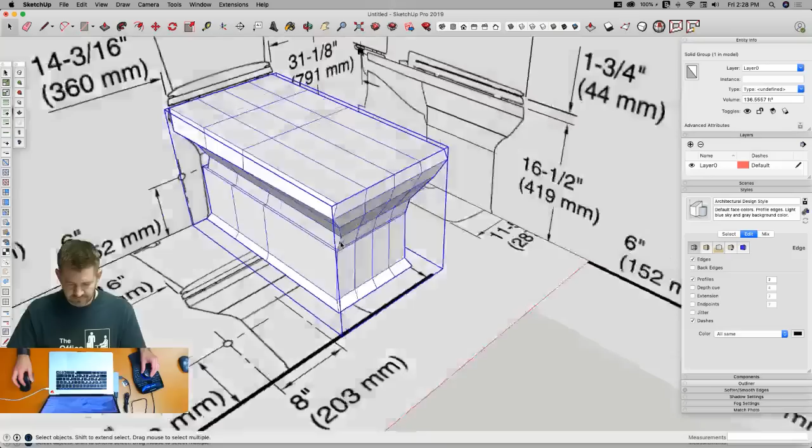Awesome. I'm going to grab this line right here and this line right here, use vertex tools to pull back a little bit. Oh yeah, that's good stuff right there. All right, grab these lines right here, all of these lines, and pull them in. Starting to look kind of toilety, in a good way. Looking good.

So I already have some spots that I know I'm going to want to sharpen. For this top, this line right here, I don't want too extreme - actually no, I do want to do this. I don't want it to be too extreme of a bend, don't want it to turn over too far, so I'm going to crease it, maybe to about 65%.

Oops, solid inspector instead of sub-D. Yeah, that's okay - right now I'm subdividing to the lowest, coarsest subdivision level. I can hit the plus key and go a little deeper, but I think that's kind of what I'm looking for there. I want to keep a little bit of a rim there.

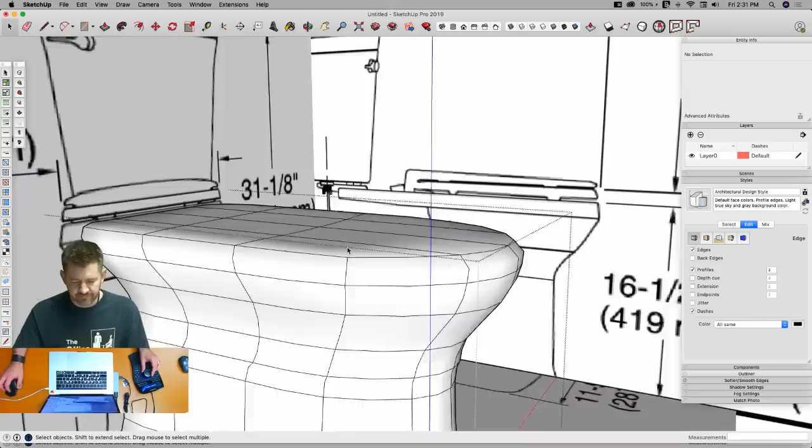All right, looking good. So this portion right here goes back to about here, and then it gets narrower. It sinks in. So I'm going to grab that whole block, front and back.

I'm going to hit Vertex Tools and scale it this way. Vertex Tools by default scales about the middle. See that, how it's scaling the same on both sides? So it does that, and pulls that together.

I'm going to grab this section right here and pull it forward. So how are you referencing the other lines with Vertex Tools? I'm not actually referencing anything right now. That's the answer. I'm sculpting. I am full on winging this right now.

Nice. All right, I'm gonna grab these little overhanging pieces right here.

The other thing to watch when you're using Vertex Tools is it will tell you in the upper left corner how many vertices are selected. You have to be careful, just like in SketchUp, when you grab a bunch of stuff, you have to make sure you don't have geometry on the back side selected. Whether you select and click edit vertices, or you're editing them right from inside, you have to be careful you don't grab a point on the back of the model and start moving it around, because that can really mess with your geometry. So I always keep an eye up here.

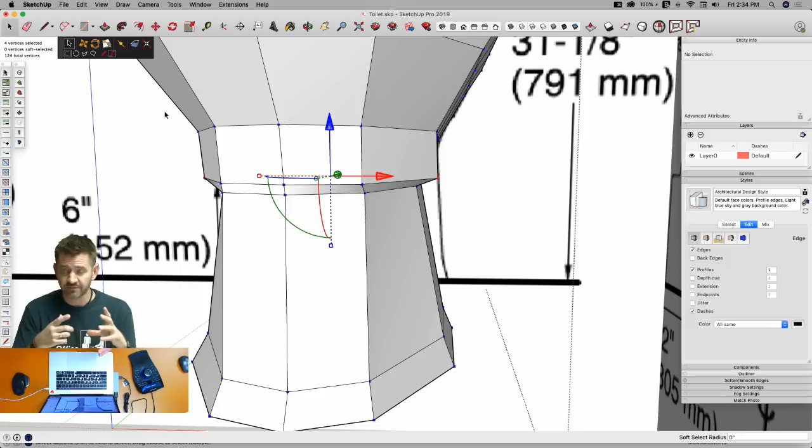All right, so what I need to do is this first. This is gonna come back and then cut back like that. That means I need more geometry. I don't have enough geometry right now, so this point is at the widest spot. Then it's going to come back to another spot here and then run back. So I have here, 2, 3, 1, 2, 3. Actually, I do have enough right now.

So if I grab... that's an error message from Vertex Tools. I make those a lot. Actually grab all of this right here. Nope, I have 17 vertices, so that means I got something extra.

I should have an even number selected right now. Oh, maybe not. 1, 2. Looks right. Well, let's try scaling it and see if something bad happens. All right.

That in. We're getting toilet bowl-y. Oh, that's one vertex. Not enough, I want to get one on either side. There we go, 2. I feel like the Count on Sesame Street.

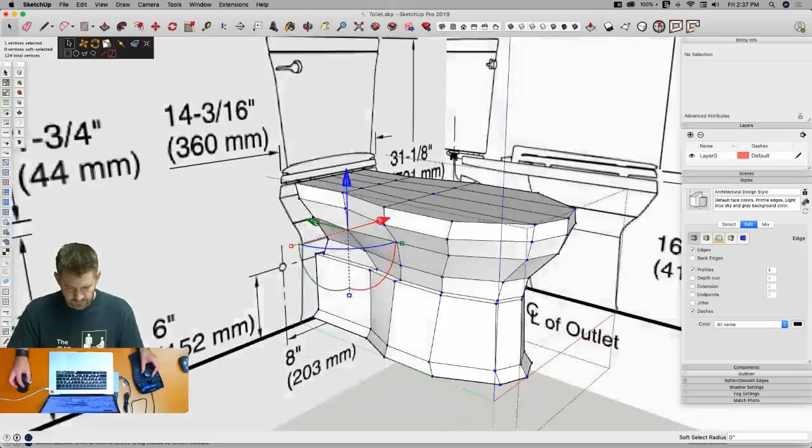You can actually add creases while you're in subdivision like this, but it does definitely slow the game down a little bit. Let's pull it in. We might need a pretty severe number in there to get it to pull back the way I want. 100% seems to look pretty good, but I think that's going to cause too much of a crease elsewhere. Yeah, that's a little harsh right there, that cut. So I'm going to pull that back down just a little bit. There we go.

I don't want to brag or anything, but it's pretty obvious that's a toilet bowl. Somebody said hurry up, they need to use it. This is for display purposes only, you can't use it. Not fully functional.

All right, looking good. Wrong button again, let's use this one. I think what I want to do is pull this back in tighter, like that. Same thing up here. Whoops, I only got one. Why am I not getting it? All right, you've got to go, you're in my way. Look at that. Ew, I made a mistake. I'll pull this back where it should be. There we go, back to symmetrical.

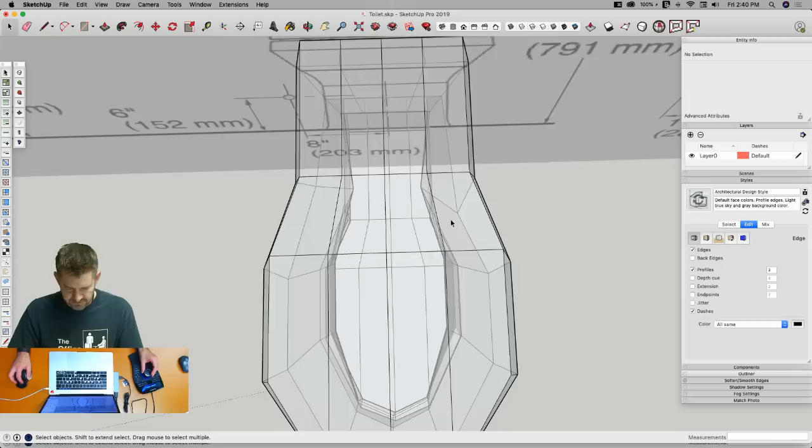And I want to kind of come up with that look. So I'm going to unsubdivide, and I think that's going to be all about this geometry right here. Bring this up further. Bring this under, like that. There we go, we're getting that undercut for sure. I think we're going to want to pinch this in ever so slightly as well.

We're going to do the same thing here. Pull these in, they're too far out. Pull those in. Whoops. All right, let's subdivide that. That's closer. I might have to actually crease that a little bit, as well as pull these two points even further in.

Sometimes when you're doing subdivision modeling, when you're creating your control mesh, you end up over-compensating. So I pulled that in pretty far, that's pretty skinny back there. Maybe go a little more, because I know that when I hit subdivide, it's going to kind of smooth outwards. Just something you have to get used to, I guess, if you're doing this.

I may grab these three lines and these three lines and do a little more creasing. So I'm going to go up to like 50%, see if that holds my bowl shape. A little better. Yeah, I don't like that very much. Maybe if I go to a higher resolution, does that look a little better? Yeah, that's getting there, getting closer.

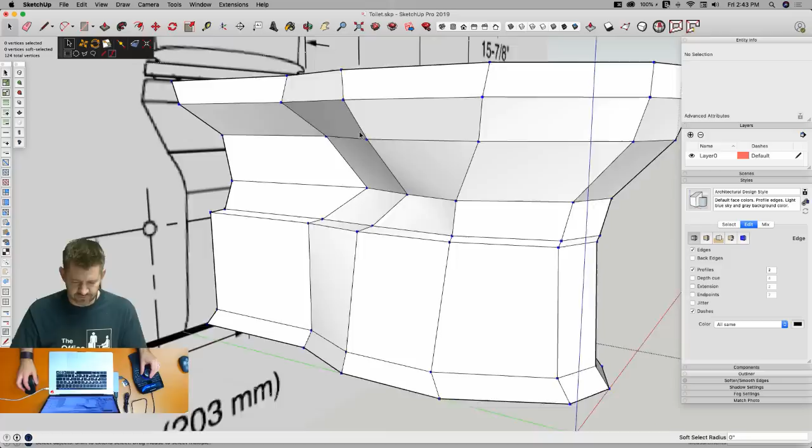Let's unsubdivide this. So this edge around here is definitely creased. I do have a definite lip right here, not like a 90%, but definitely something like that. I'm going to grab these two lines and pull them in, as well as these two. Hit the U button instead of the V button.

Shortcut keys can't always save you. All right, vertex tools, pull those in a little ways. Ooh. Starting to look pretty good. Let's hide the lines. All right.

I could spend all day on this. I'm going to stop. And I'm going to come in here and we're going to just create an indent for the actual bowl itself. I'm going to grab these lines. Oops, I'm going to unsubdivide. I'm going to grab these surfaces right here and do something with, this is the button you can just barely see over there, the connect edges tool.

One. Nope, that was not the right tool.

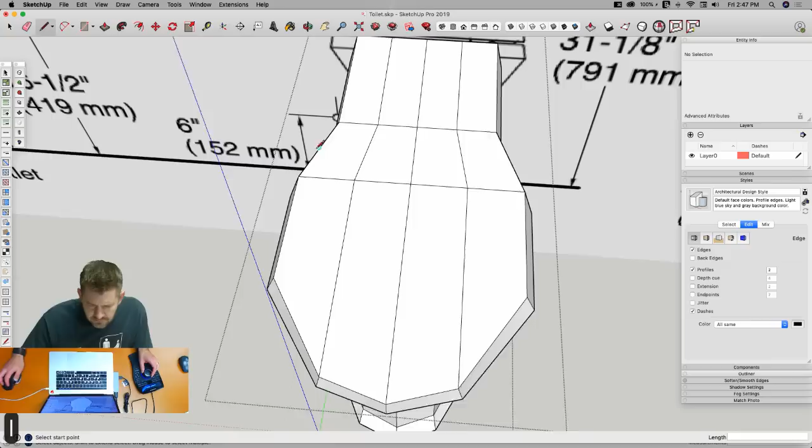I went 65 on the outside, I'll match that now. All right. Hey, you didn't know better. All right, so I will now...

Whoops. See, this is the difference between vertex tools and regular moving. If I move in plane, I got no issues here. But if I grab this right now and try to move it out of plane, it's gonna auto fold, so it'll let me move it by creasing the geometry. But when I'm done, I have a bunch of triangles, and they're not symmetric triangles. Look what's going on over here, rather than my nice 4-sided shapes.

If I grab vertex tools and do the same thing, those same 2 lines, and I just move them vertically, it maintains my quad geometry. It doesn't always do it perfectly, but it does prevent my geometry from getting not good.

All right. I don't know how well you can see this, but if I look at my hidden geometry, it does still break the geometry. What it does is it takes the inside pieces and breaks them, and it hides and smooths this edge automatically, is basically what it does. This looks pretty good, but you can see there's some inconsistencies.

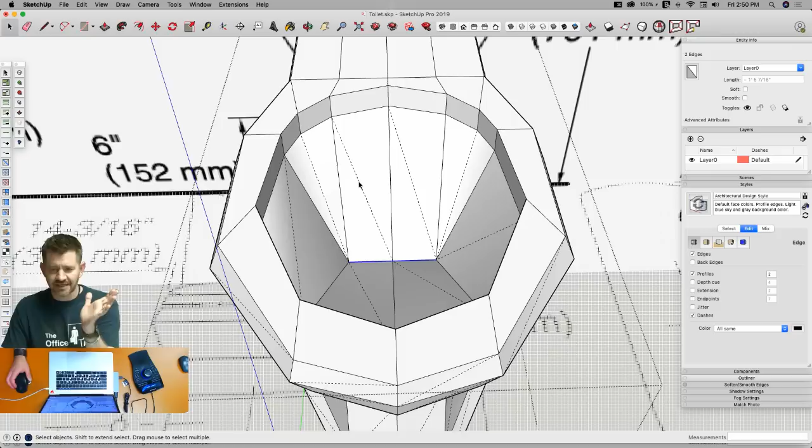All right, so this time, take this section right here, vertex tools, bring that out. Grab this right here, vertex tools, bring that out. And the top, go a little further.

And then what I'm gonna do is grab this loop right here. Actually, I need to clean this up first. Grab this loop, select that all the way around, and use vertex tools to kind of pull it back in. And I'm going to grab this loop right here all the way around, and use vertex tools to bring that in both directions fairly significantly.

What that's going to do now is when I hit subdivide, oops, I didn't group it yet. When I hit subdivide, that's going to give me kind of a seam there, so where the lid and the bottom part meet, I don't want to model those separately. You can also see on this, we have a whole lot of creasing to do because that basically turned into a ball, so we have a whole lot of geometry that we need to grab.

I'm going to start by using the top and the bottom, and, whoops, this plus this plus this plus this. I'm going to grab those all real quick, crease those to like 80% or something, so they're going to almost be a 90-degree angle. Did you save?

Not recently, I'm going to save. Thanks, YouTube. And, all right, that looks better.

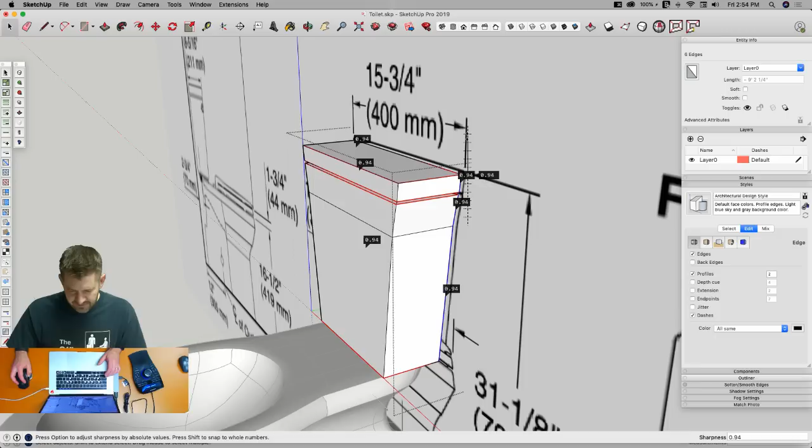That's pretty close to what we want already. Obviously got some geometry to, oh well, that's good to know. Got some geometry we need to clean up, like this back section. We want to take, well, back like that, and then we're gonna probably want to take both these rings, that loop and that loop, and use vertex tools to bring it in a little narrower here, a little narrower here, and then maybe subdivide that. That's a pretty good seat right there. A little bit higher. Right.

So one of the things that's happening right now, if I look inside, we don't seem to have a bottom. So I'm going to hide the rest of my model, take a peek underneath. Yep, that's an issue. So I will have to, here, let's do this. If I draw lines right now, it's going to create surfaces in between each of those segments. So I'm just going to grab this whole top surface, copy it down, click on the white portion, and hit Orient Faces to flip it all back.

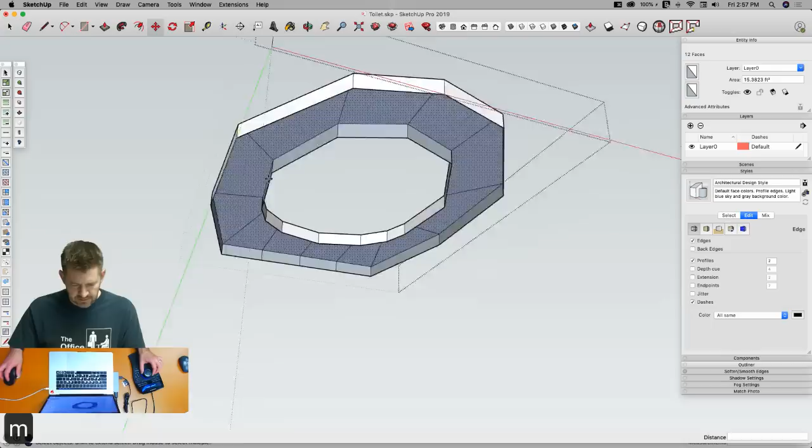And once that's done, I'll do the same thing. I'll just grab this geometry, because I don't want to have to create a bunch of internal faces. If you do ever use push-pull or copy or draw lines and accidentally draw interior geometry, that is a spot where Solid Inspector is great, because it will, with one click, fairly easily let you clean it all up.

All right, I'm going to orient faces again. I'm going to grab my exterior loop right here, same thing I did before. I'm going to crease that to a higher, maybe 80 degrees or 80%. I don't know if this has, it does, that's at 34. I'm going to pull it even lower. All right, so let's subdivide that. Yeah, good enough. All right, increase that. That looks good. Subdivide that. That's a pretty good looking toilet right there.

All right, so one of the things I'm gonna do real quick, so this actually consists of 4 groups. I'll make a copy of it over here. I'm gonna make this into a single group. We have some questions about the triangles.

Triangles. All right, let's talk about triangles. So the triangles on the sides are okay? Triangles on the sides. Oh, these right here? Well, here, let's check this out.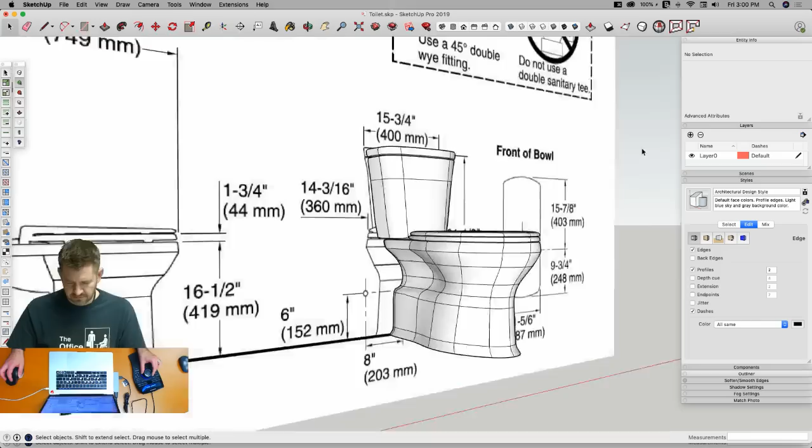So yes, good call. Thank you very much, that was extra. I had some spare geometry in there. Which is always what I like to challenge myself with when modeling with Subdivision: what's the fewest number of polygons I can have and still get the geometry I want. It's real easy to go in and make a bunch of small quads and have it smooth over, but using creasing and smart geometry, what's the fewest you can actually put in there?

All right, so I have all this in one group. I'm gonna go in here right now, and right now it's still subdivided geometry, so I could come in here and toggle this on and off. Before I export it out though, I can grab all these and say, I'm gonna save. Save. And then I can say explode.

So now it's no longer subdivided geometry, it's just geometry. So I can grab all of it and do things like soften and smooth to get rid of those extra lines. And I can take this now and make it a component.

And just like I did with the other pieces, I can save as to export this as my Friday toilet. That makes it sound like I got a toilet for every day of the week. I don't. You could make one in SketchUp for every day. That's right, we could actually make an array times 6 and rename them. Oh no, error, that's too many toilets. Now I feel like I'm at Lowe's.

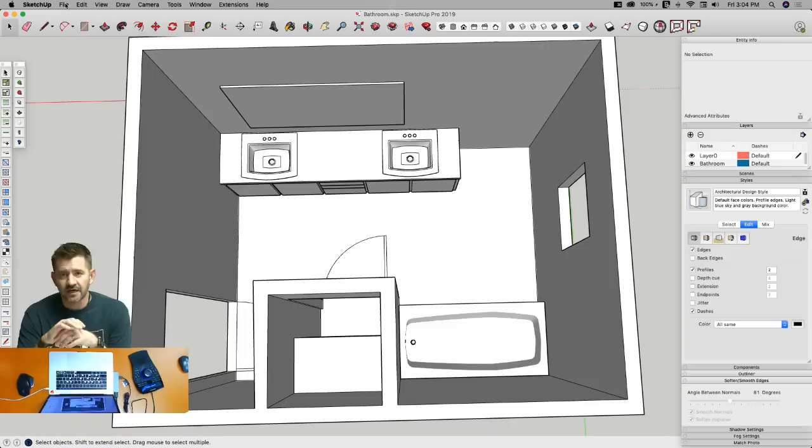Now, save as Friday toilet. Replace it. Let's see if this works better. File. Import. Nope.

Good, good, we're ending like we started. I appreciate that we've come full circle. You know what? I'm just going to do this, I know how big it is.

All right, monster toilet. Whatever you do, don't put Mark in the giant toilet. He'd fit. Scale the definition.

All right, that looks better. There we go, grab this by the front and line up with the middle of that space. Grab by the back, come back here, and then I can't remember how far you had to pull it out, but that far. And with that, we have a toilet. Nice. So there we go, toilet, sinks, tub.

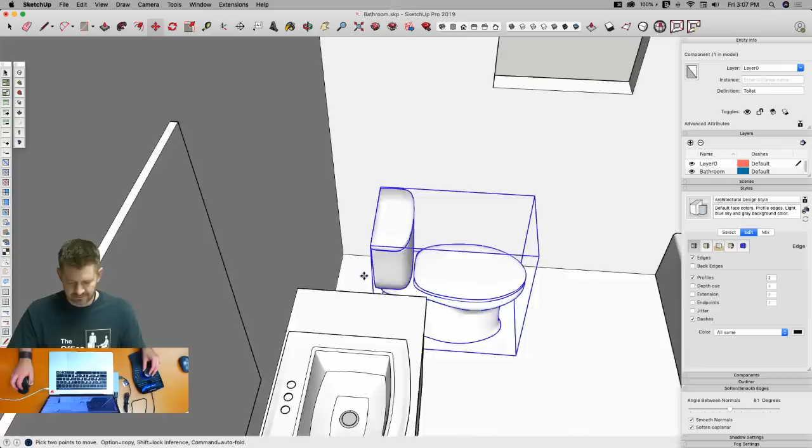See all these little teeny tiny surfaces? This surface, this triangle right here, is the same amount of data as this triangle right here. So when people talk about a big file versus a small file, that doesn't really matter to a computer, it's really about the data that's in there. Every triangle has data about where it is in reference to the whole model. So a whole bunch of teeny tiny triangles like this will end up causing a small model to be bigger than a bigger model.

This is one of the nice things about subdivision: you create an ordered mesh, so you end up with fewer of those. As we look at it, it gets a little denser right here where I had a ring, where I have this indent, it's a little denser, but the rest is fairly consistent as far as the size of the geometry. So that's one of the advantages of subdivision modeling versus lofting, or over here where we got follow me.

Let's see how big the tub is. So if I grab everything in the tub, that's only 6,000. That's tiny. But yeah, that's a good question, because that is very important.

That's a good thing to know about a model when you pull it in. Looking at these two pieces side by side, I would generally assume a toilet's going to have more geometry and thus be a bigger file than something like a sink. Turns out I would be wrong in this particular instance. But generally, if you go look at 3D Warehouse, you can have some crazy huge files, especially with stuff like toilets and fixtures and sinks. Some of those models are created in other software, like SolidWorks, where they create really dense, high polygon meshes that are just enormous, taking up a ton of space.

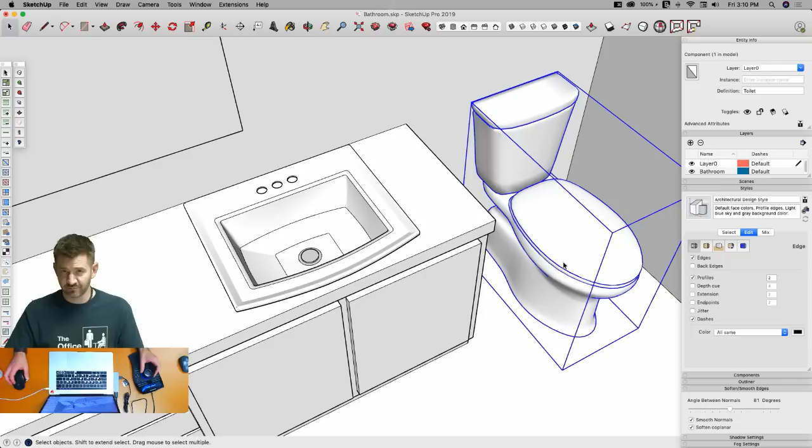Dave wants to know, really, what makes Teflon stick to the pan? That's his question. Magic. You know, the only thing I know about Teflon is it had something to do with the heat shielding they were creating for the space shuttle. I don't know if this is true, but I heard it was one of the materials they were testing for heat shielding, found it wasn't as good a heat shield as they wanted, but found out it was nonstick, and that's where Teflon came from. Fun fact of the day. I know, I need a little 'the more you know.'

Yeah, let's throw some textures on here. Unfortunately these are going to be stock textures because I don't have a library of good looking wood and tile textures like some of you out there have. So I'm just gonna come in here, hit B, let's see what we got for tile flooring. We'll start there, start at the ground and work our way up.

So that works on layers, groups, whatever—going from one context to another. If you copy it and then paste in place, it'll go to the same absolute location, but it'll stay in the context you're currently in.

So where are these textures that you're using? Where are they stored? These are actually the default textures stored in the installation of SketchUp. Ah, there you go, Christopher—he's having a hard time finding them.

Yeah, they're actually—the SKM is how SketchUp keeps SketchUp material files. SKM, that's what it means. The SKMs are actually stored somewhere inside the installation. I can't even tell you exactly where, and it's different for Windows than it is for Mac too.

So generally speaking, I usually recommend using these particular materials just to get your feet wet, and as quickly as possible get your own high resolution imagery and use that instead. This is good stuff to get started, but it's not very extensive—it's a handful of samples, and they're not super high resolution. Not that you want super high resolutions necessarily, but they're not the highest resolution you could get. You could probably find something that looks even better.

I'm going to put a faux reflective surface onto... just a little too big. All right, I'll have to fix that.

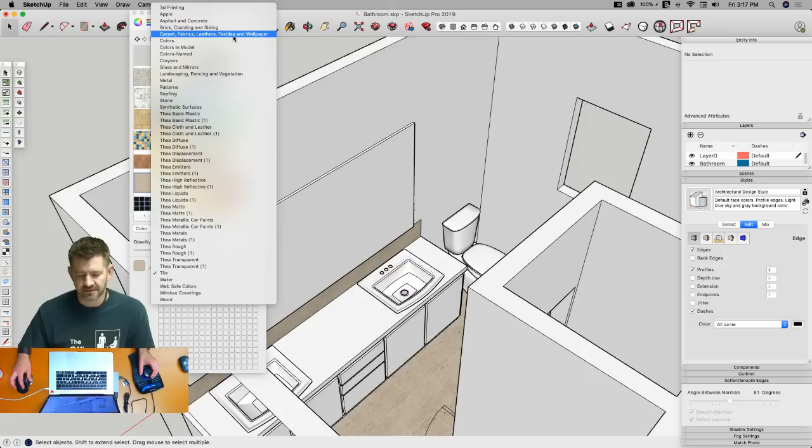All right, let's get some wood in here—so I'll teach you guys to ask me to show you something like this. Wood in the bathroom, interesting. Betcha—oh, it's so bad. So this is an example of this texture looking all right if used in a small quantity in a controlled environment. It's not so good when you throw it in mass quantities like that. Hey, that's looking good—look, no, it's not. I'm sorry, I can't lie to you guys.

All right, let's go—let's throw some beige on the wall too, just to really tie it all together.

Somebody asked a question earlier about this UI, about this. This is not a plugin or an extension—this is just the Mac color picker. On Mac and Windows, we leverage the native color selection tools offered by the operating system, so you'll see different tools depending on which operating system you're in. That's why somebody asked why they didn't have that—it's not something extra I have installed, it's just because I happen to be on Mac.

Yes, the crayons are so much more fun than the Windows version. They are, it's pretty fun.

So to answer your question, I can throw some colors on here. The real question is, should I?

We're gonna assume our shelves inside are painted white. Wow, this is very beigey. It really is, this bath. I'm assuming this is a standard or spec-built house with the default paint. There always seems to be like an off-white, beigey kind of color. It's really something. I'll get this out of the way.

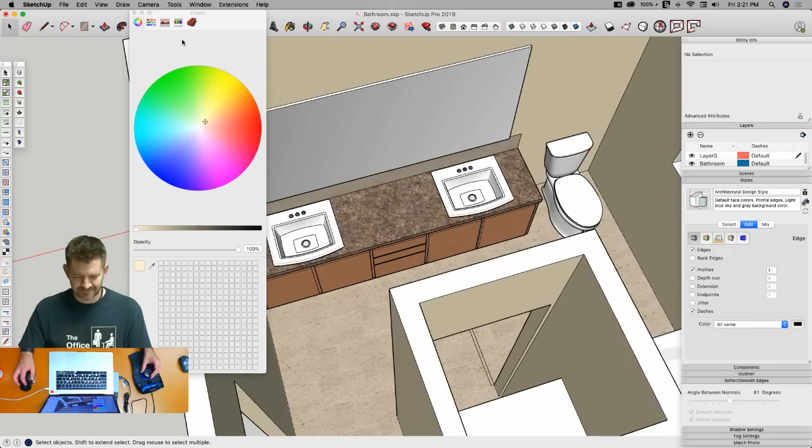But let's drop the camera a little more inside the room, maybe right here next to this. There we go, and see how much we can do if we play with field of view from here. There we go, so we actually get back and see a little bit more. That's a spot where you may want to take advantage of field of view. There we go, look at that. So now I can actually see the whole bathroom from here.

The other thing, like I showed originally, is I am actually looking through the walls too. So that's a nice option, because it lets me, if this wall had been painted, eventually field of view will even pull me back outside of the wall. Kind of a nice thing to consider, especially as you have these small models.

Something else to look at or think about is this right here. As I'm looking in here, let me reverse and get my white ceiling, there we go. As I'm looking at it like this, let me get past that little line down there. What was I saying? I got distracted, I was going to show you something else.

We have a question that wasn't necessarily related to the bathroom, but to textures. So when you export a video from SketchUp, the textures on large flat faces and they are flickering. And he goes on to say, is there an OpenGL version responsible for this? It would be interesting to see what you're seeing.

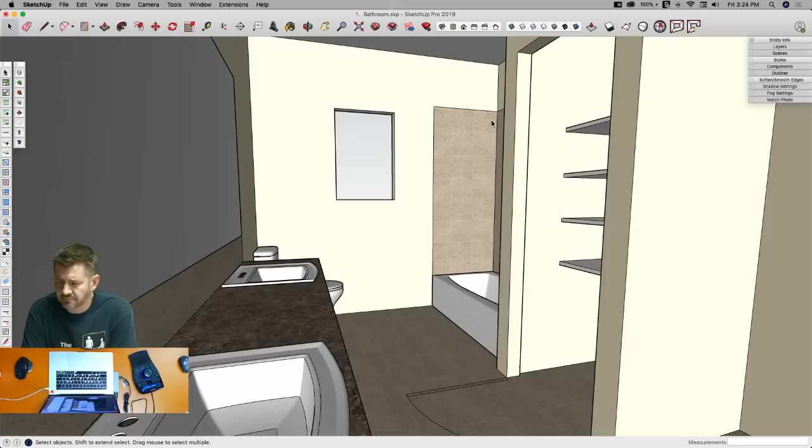Yeah, and there are no dumb questions. If you take one thing away, remember, in a situation like this, there are no dumb questions, only dumb people. And those dumb people aren't here tuned in. That's why they're dumb. So you guys are smart guys. You can ask any question. It's never a dumb question.

Oh, what I was going to say is shadows. One of the nice things SketchUp does is give us shadows. When you're inside a room like this, it can actually cause a little bit of a problem because I have no light now. But you can actually select individual surfaces. So I can grab the ceiling, for example, and turn off cast shadows. That will allow light to fall in.

I can actually do the same thing with things like my walls and turn off cast shadows. I'll do the back of the walls too, which will actually let light in. Not that you'd want this specific thing, but if I really want to know what kind of shadow my toilet casts, you can do that. So you don't have to have cast shadows even if you have surfaces covering up. Just something I wanted to throw out there. I don't know why I felt compelled to tell you that, but there you go. That looks really weird, I'm going to have to undo that a couple times.

All right, what else you guys got? Turn on my normal well-lit bathroom like that.

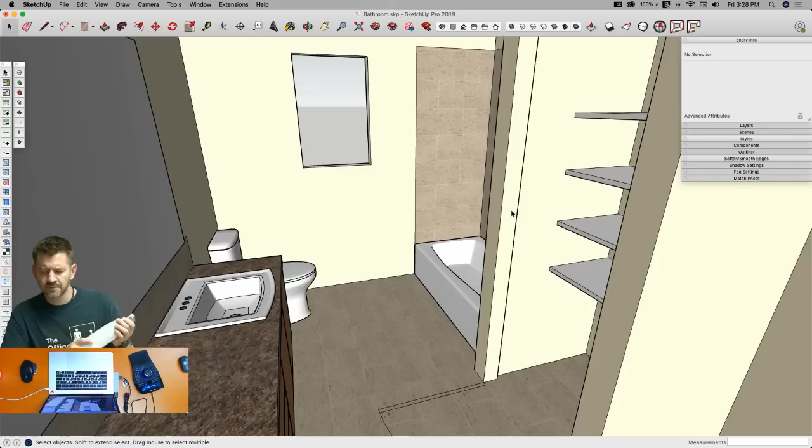So an older model's transparency won't look the same. If you're saying I take a model from here and bring it in here, it should look the same because the transparencies are rendered the same, but it's possible something's incorrect. So not to throw it all into the forum, but when it comes to troubleshooting a very specific issue in a specific model, there's really no better solution than actually getting the model and trying to fix it there. I would say bring your model up to the forum and share it, and I bet we could get it figured out.

You bet. Or is that, were you thanking somebody else? I'll take that thank you. You're welcome.